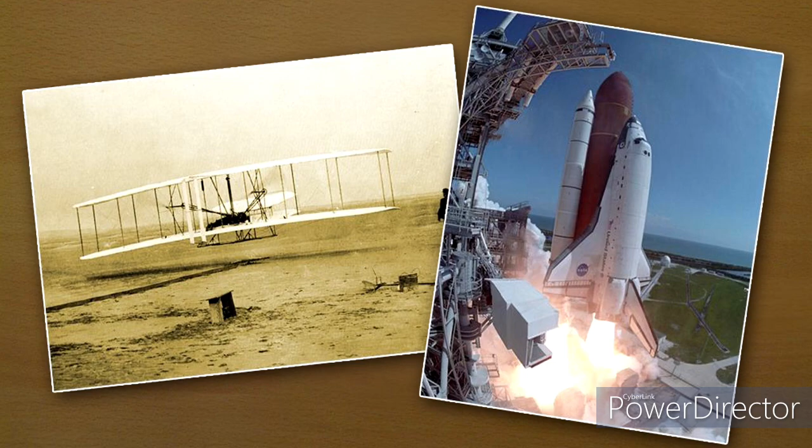As far as modes of transport are concerned, civil aviation has been the fastest growing and the most technically innovative of them all. From the first attempts at powered manned flight to regular spaceflight, we have only just exceeded 100 years of aviation.

What is incredible is that the first scheduled international air service was started in 1919. It is probably no coincidence, therefore, that the first International Conference on Civil Aviation took place in 1919 in Paris. Since then, the field of our chosen profession has been subjected to far more international legislation and international agreements than any other profession.

The overriding need, which is recognised by all, regardless of political inclination, is for higher and higher safety standards. The degree of international cooperation in this respect is outstanding, and shows that where there is genuine desire to achieve international agreement, it can be forthcoming.

After the Second World War and the huge technological advances that were made in aviation, the world at peace sought the solutions to the huge legal and economic concerns that confronted them. There was the question of commercial rights, the legality of overflights of other nations' airspace, and the maintenance and development of navigation equipment, often placed in sparsely populated parts of the world.

For these reasons, the United States of America conducted exploratory discussions with the Allied nations during the early months of 1944 to seek solutions to these challenges.

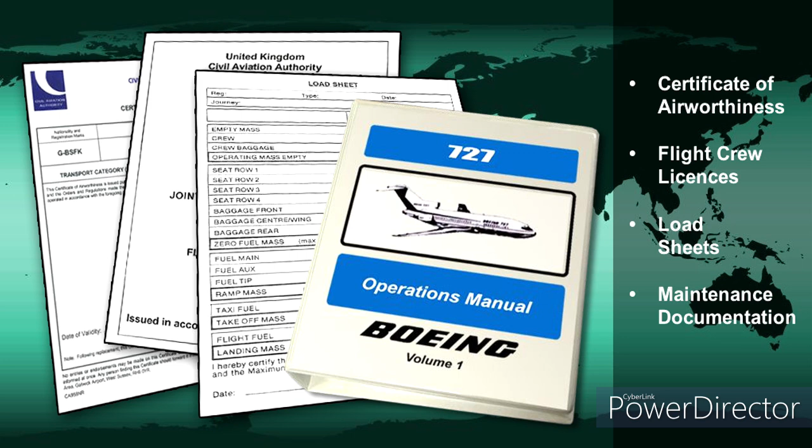Let's now take a closer look at the International Civil Aviation Organization itself. As we said earlier, the ICAO, created by the Chicago Convention, is an intergovernmental organization which has become a special agency related closely to the United Nations.

Based in Montreal, it provides the machinery to achieve standardization between contracting states for all technical, economic, and legal aspects of international aviation. The aims and objectives of the ICAO are to develop the principles and techniques of international air navigation.

It aims to foster the planning and development of international air transportation so as to ensure the safe and orderly growth of international civil aviation throughout the globe, encourage the arts of aircraft design and operation, encourage the development of airways, airports and air navigation facilities, meet the need for safe, regular, efficient and economical air transport, prevent waste caused by unnecessary competition, ensure the rights of contracting states are fully respected, avoid discrimination between contracting states, promote safety of flight in international airspace, and generally promote all aspects of international civil aviation.

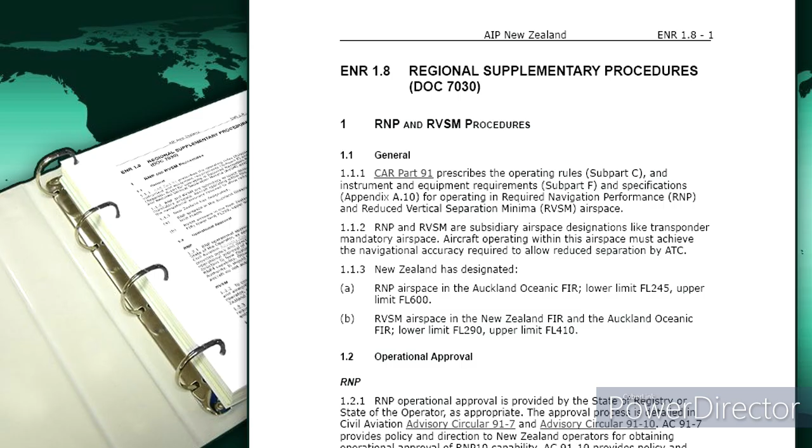It should be noted that PANS are approved by the ICAO Council, whereas SARPs are adopted by the ICAO Council.

The ICAO also publishes a wide variety of publications in the forms of circulars, pamphlets, manuals, and the ICAO Journal, which cover technical, economic, and legal subjects. It also issues training manuals, films, plans, and digests, all designed to inform the global aviation community.

Two other important documents have been developed to accommodate ICAO's desire to facilitate the exchange of commercial air transport rights. Not all signatories were originally able to agree to this desire, so two supplementary documents were created. These two supplementary agreements establish important international aviation rights.

The first agreement, the International Air Services Transit Agreement, makes provision for aircraft of any participating state to fly over or land for technical reasons in the territory of any other participating state. The second agreement, the International Air Transport Agreement, further provided for the carriage of traffic between the state of registry of an aircraft and any other participating state.

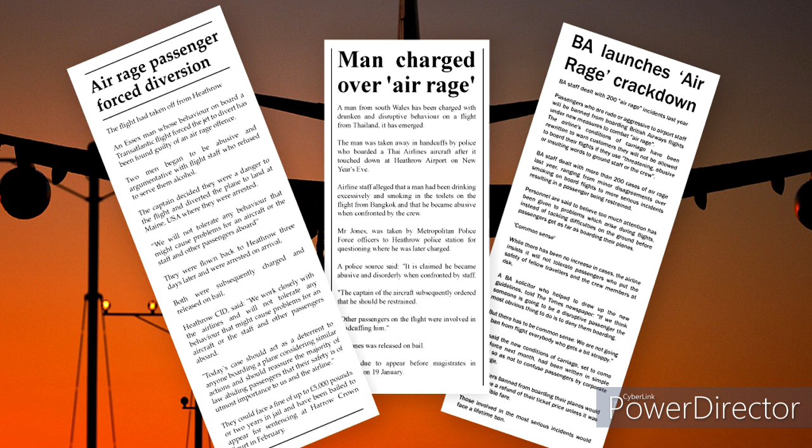The ICAO conventions allow any aircraft commander who has reasonable grounds the ability to restrain any party on board, and to protect the safety of the aircraft, persons or property on board, maintain good order on board, deliver or disembark any person to the competent authorities if he believes they are jeopardizing the aircraft. While the commander can demand help from a member of the crew, he or she can only request the aid of a passenger or other non-crew member.

You should now understand that the protection of all aspects of international air transportation is a complex and constantly changing situation. The cooperation between signatory states to ensure that the highest standards of aviation security apply, whilst maintaining the advantages of the expeditious nature of air travel, is essential.

Although most regulation has been defined and adopted by all states throughout ICAO, some states within their own regions have created separate additional layers of regulation, an example of which is the European Union, the EU. This lesson will therefore briefly mention the regulations and the governing bodies within Europe.

The driving force for a common civil aviation policy across Europe is the European Civil Aviation Conference, ECAC. Set up in 1955 under the auspices of the Council of Europe and ICAO, its aim is to define a European approach to a general structure for civil aviation in Europe, licensing, safety, European regional air traffic control, and a structure for civil aviation marketing within Europe. Because of its established position within Europe, ECAC is able to be the forum for the consideration of major civil aviation topics relevant to all the European states.

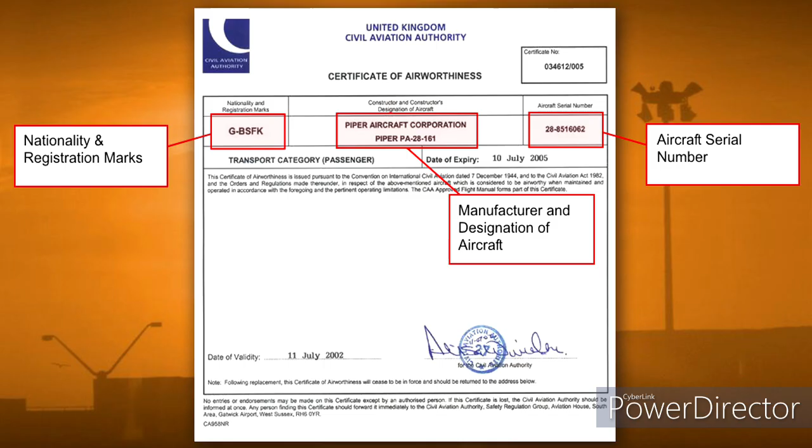The State of Registry of an aeroplane is responsible for determining if that aircraft continues to be airworthy, and is required to maintain a system for recording faults, malfunctions, defects or other occurrences which might affect its airworthiness. The state of design is required to ensure that a structural integrity program exists, supporting all aircraft. This program must specifically identify corrosion control measures.

The C of A will be renewed or remain valid, provided that the continued airworthiness of the aeroplane has been determined by a periodic inspection. The period between inspections is to take into account the type of service and the time elapsed between inspections, or be in accordance with the system of inspection established by the state. When an aeroplane is damaged, then the State of Registry must establish whether the damage is of such a nature that the aircraft is no longer airworthy.

Each aircraft is required to have a flight manual, in which the approved limitations are defined, and any additional information is contained as is necessary for the safe operation of the aeroplane.

As aviation grew rapidly during the early part of the century, the need to communicate with the ever-increasing number of aeroplanes in the sky made it necessary to ensure that all aeroplanes could be uniquely identified, much like cars are identifiable by their registration number. Therefore, as early as 1919, at the Paris Convention, delegates decided that all aircraft were to be registered, and that each aircraft was to display its registration mark.

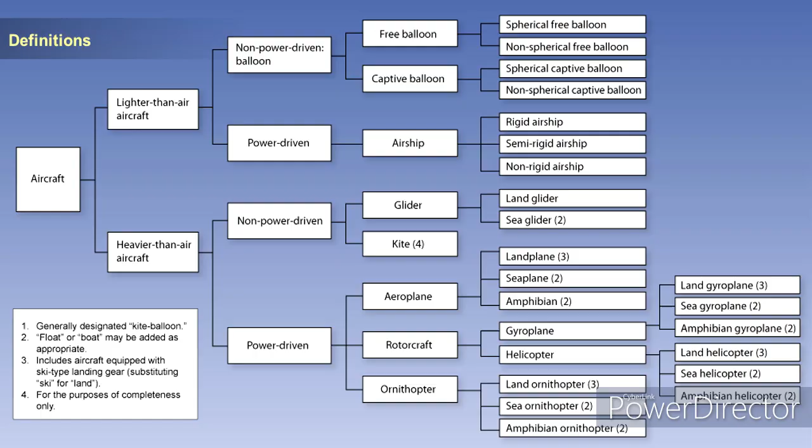It was decided that the nationality and registration marks would consist of a group of characters, with the nationality mark followed by a hyphen if the first character of the registration mark is a letter, then followed by a 3 to 5 character registration mark.

The nationality mark is selected from the series of nationality symbols included in the radio call signs, allocated to the state of registry by the International Telecommunication Union. This code is notified to ICAO and may consist of letters, numbers, or both.

A common mark is a prefix to an aircraft's registration, where the aircraft is operated by an international agency, not a country, like the Red Cross or United Nations. If this is the case, an establishing nation will assume the responsibility as the state of registry. This mark is assigned by the ICAO.

A good example is the common mark 4YB, assigned to aircraft of the Arab Air Cargo, run by Jordan and Iraq. The state of Jordan assumes state of registry.

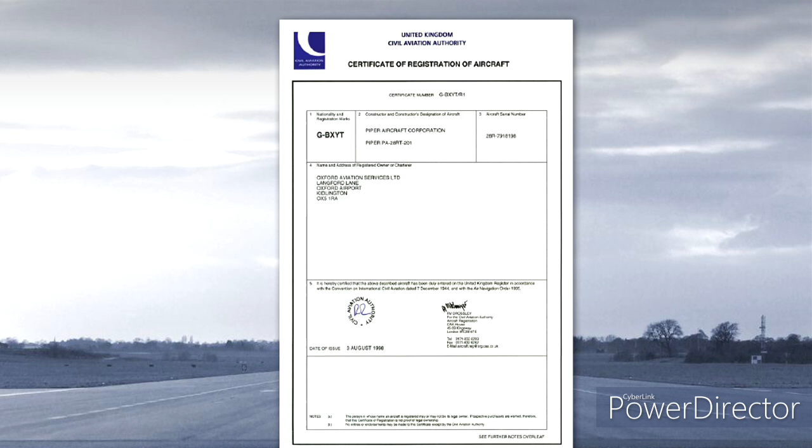The Certificate of Registration is an official document certifying that the state of registry has registered the aircraft. It will always detail the nationality or common mark, the registration mark, the manufacturer's designation of the aircraft, the serial number of the aircraft, the name and address of the owner, a certificate stating that the aircraft has been entered on the register of the state, the dated signature of the registering officer. The certificate is to be carried in the aircraft at all times.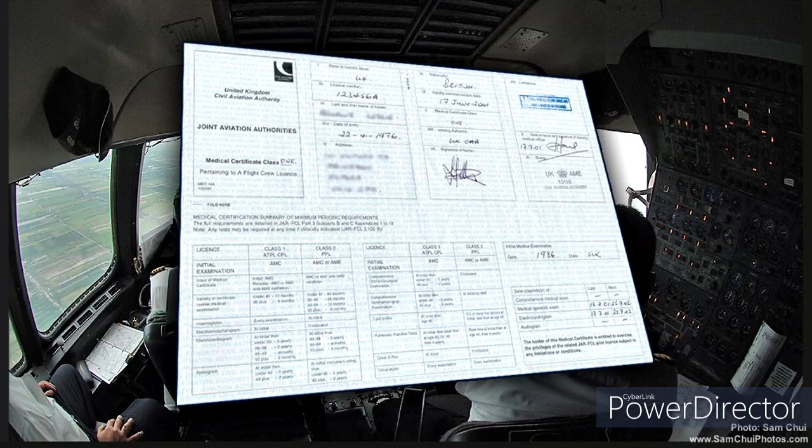Within the 5-year period of validity of a JAA licence, a national authority, referred to as the authority in JAA speech, will reissue the licence in the following circumstances: after initial issue of a rating or renewal of a rating, or at the discretion of the authority when a rating is revalidated.

The holder of a pilot licence who has attained the age of 60 is not permitted to act as pilot in command of an aeroplane engaged in commercial air transport work, except as a member of a multi-pilot crew, and provided that the other pilot has not attained the age of 60. A pilot reaching the age of 65 is not permitted to act as a pilot of an aeroplane engaged in commercial air transport. This limiting age is 60 in some member states, for example, France.

Applicants for a Joint Aviation Authorities licence must complete the requirements for licence issue to the satisfaction of the National Aviation Authority of the state under whose authority the training and testing for the licence were carried out. That state, on issuing the licence, then becomes the state of licence issue. The state of licence issue is the country in which the aviation authority which authorises a person to act as a pilot is headquartered.

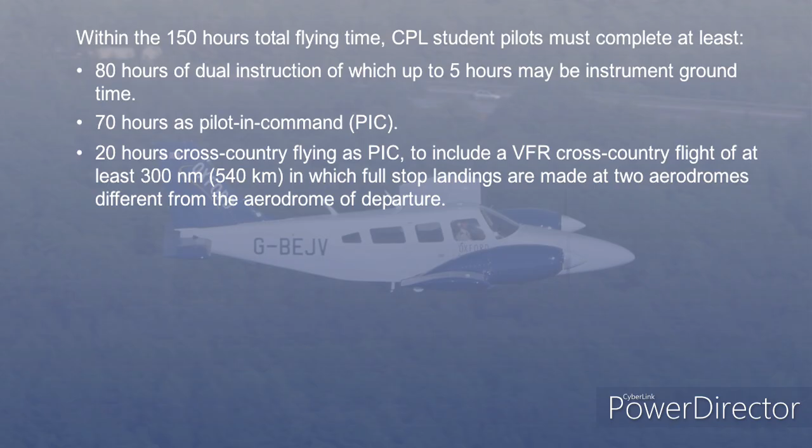During the course of which full-stop landings are made at 2 aerodromes different from the aerodrome of departure, 5 hours night flying, comprising 3 hours of dual instruction, to include at least 1 hour of cross-country navigation, as well as 5 solo takeoffs and 5 full-stop landings, 10 hours of instrument flight instruction, of which up to 5 hours may be instrument ground time in an FNPT 1 or 2 or flight simulator.

5 hours of flying instruction must be carried out in an aeroplane certificated for the carriage of at least 4 persons, and have a variable pitch propeller and retractable landing gear.

In the case of an entrant to CPL training who already possesses a PPL, 50% of the aircraft hours flown by the entrant prior to commencing the CPL course may be credited towards the required flying instruction, up to 40 hours flying experience, or 45 hours if a night flying qualification has been obtained.

The aim of the CPL modular course is to train PPL holders who do not wish or who are unable for any reason to undergo integrated training to the level of proficiency necessary for the issue of a CPL. Consequently, before commencing a CPL modular course, an applicant must hold a private pilot's license, issued in accordance with ICAO Annex 1.

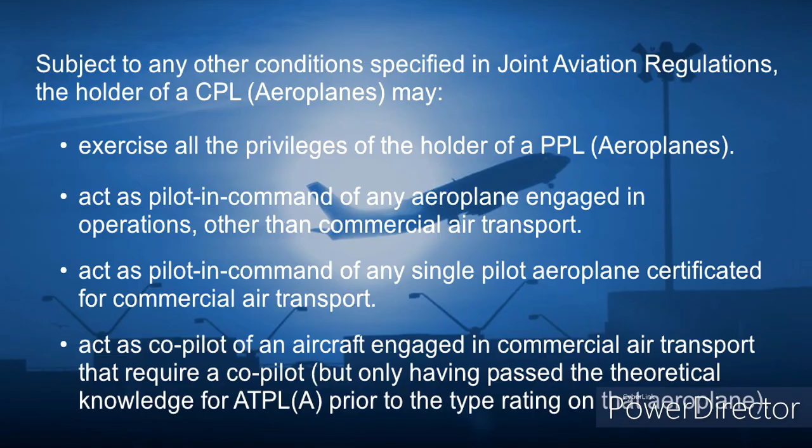Before a pilot may be granted, or continue to exercise, the privileges of a Joint Aviation Authority's airline transport pilot's license, he must hold a valid Class 1 medical certificate and have attained the age of 21 years.

Subpart G to JAR FCL1 covers the conditions which must be fulfilled before a JAA Airline Transport Pilot's Licence, aeroplanes, may be issued. An applicant for a JAA ATPL must undergo the prescribed syllabus of training at an approved flying training organisation. Training for the JAA ATPL consists of flying instruction and theoretical knowledge instruction.

Flying instruction must lead to the award of a commercial pilot's licence, together with a multi-engine instrument rating. The ATPL candidate must also have received instruction in multi-crew cooperation, as required by Joint Aviation regulations.

On completion of flying training, an ATPL candidate must demonstrate the ability to perform, as pilot in command under instrument flight rules, of an aeroplane type certificated for a minimum crew of 2 pilots, to a standard appropriate to the privileges granted to the holder of an ATPL.

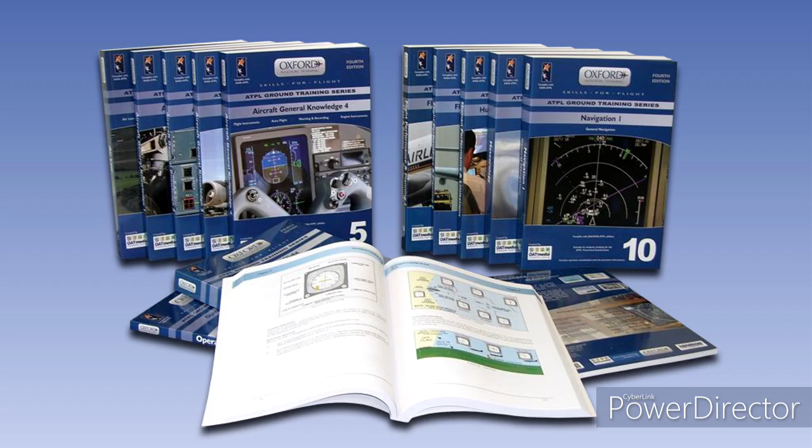The training requirements for issue of a JAA ATPL are not confined to flying training. In order to qualify as an airline transport pilot, a student must also demonstrate that he has acquired the theoretical knowledge required of a qualified airline transport pilot by passing ground examinations at ATPL level in the subjects shown on screen here.

In addition to the required training, before being awarded an airline transport pilot's licence, aeroplanes, a pilot must have completed at least 1,500 hours of flight time as a pilot of aeroplanes, of which not more than 100 hours may have been completed in an approved flight simulator. The 1,500 hours total flying time required for the award of a JAA ATPL aeroplanes must include the following experience.

Click on the inset picture to reveal each required type of flying experience. When all conditions have been revealed, the Continue button will flash.

500 hours of multi-pilot operations in a transport category or commuter category aeroplane or aeroplane of equivalent code. 250 hours as pilot in command, or at least 100 hours as pilot in command and 150 hours as co-pilot acting as PIC, but under the supervision of the pilot in command.

200 hours of cross-country flying, of which 100 hours shall be as pilot in command or as co-pilot performing under the supervision of a pilot in command.

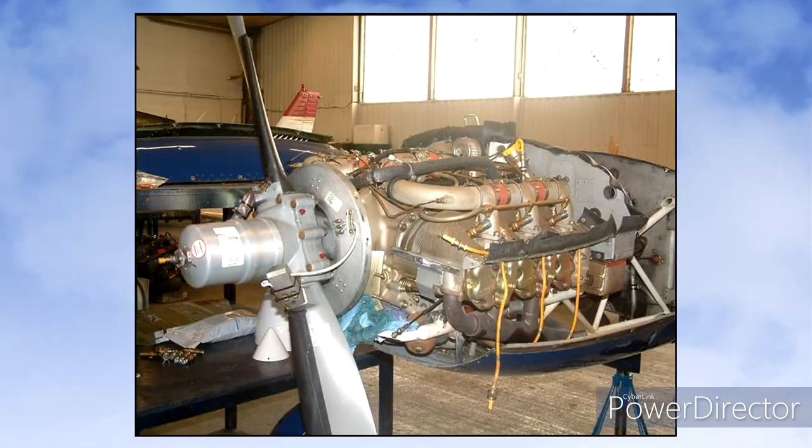Variable pitch constant speed propeller, retractable undercarriage, turbocharged or supercharged engine, cabin pressurization, tailwheel.

Successful completion of differences training does not result in the issue of any sort of certificate. The fact that differences training has been successfully completed is entered in the pilot's logbook or equivalent document and signed by a flight instructor, class rating instructor, or type rating instructor, as appropriate.

Now let's look at type ratings. As we have said, type ratings apply to more sophisticated types of aircraft. For instance, the holder of a commercial or air transport pilot's license normally requires a separate type rating for each type of aircraft he flies.

For example, a Boeing 737, Airbus A320, or Dash 8. There is no JAR FCL limit to the number of ratings that may be held at one time. JAROPS, however, may restrict the number of ratings that can be exercised at any one time.

In general, type ratings are required for each type of multi-pilot aeroplane, each type of single-pilot multi-engine aeroplane fitted with turboprop or turbojet engines, each type of single-pilot single-engine aeroplane fitted with turbojet engines, and any other type of aeroplane considered necessary by the National Aviation Authority.

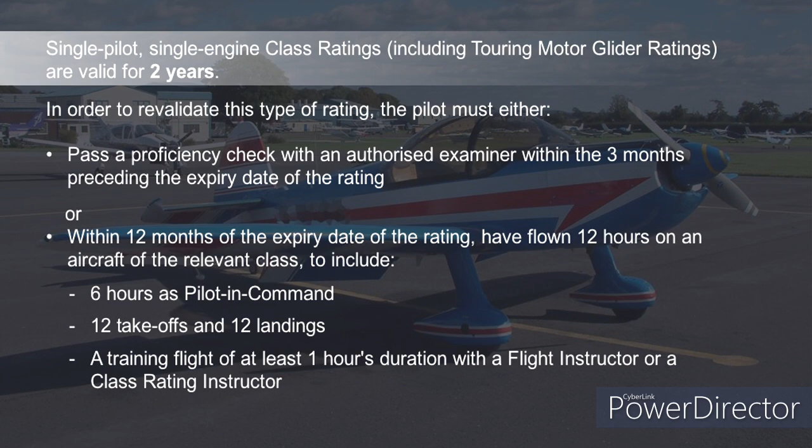Type ratings and multi-engine piston class ratings for aeroplanes are valid for 1 year from the date of issue. If the rating is revalidated within its period of validity, the new rating will be valid from the date of expiry of the old rating.

In order to revalidate a type rating or multi-engine class rating for aeroplanes, a pilot must fulfill the following conditions: undergo a proficiency check with an authorised examiner, for instance a type rating examiner, in the relevant type or class of aeroplane within the 3 months immediately preceding the expiry date of the rating. During the period of validity of the rating, the pilot must also carry out at least 10 route sectors as pilot of the relevant type or class of aeroplane, or 1 route sector as pilot of the relevant type or class of aeroplane, flown with an examiner.

In order to change to another variant of the aeroplane within one type rating category, for instance there is one type rating for both the Boeing 757 and the Boeing 767, differences or familiarization training may be required.

If a pilot fails any part of a proficiency check for a class rating or type rating, he must not exercise the privileges of that rating until all the parts of the proficiency check have been successfully completed.

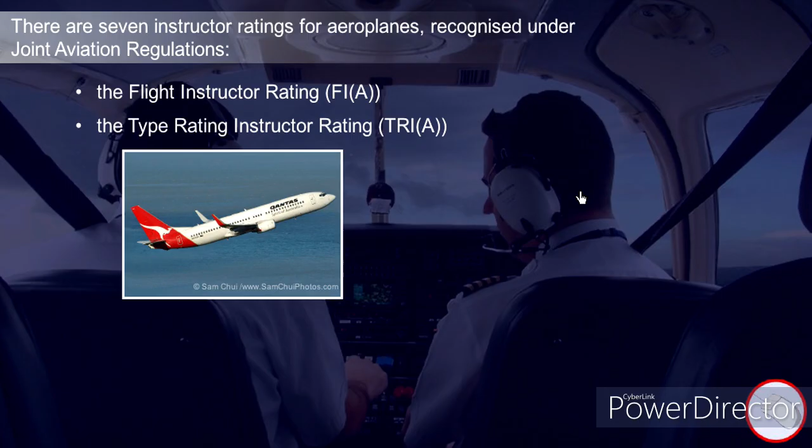The type rating instructor. A type rating instructor, as the name suggests, can prepare a pilot, usually a professional pilot, who is qualified on one type of aircraft to become qualified on a different type of aircraft.

The class rating instructor. A class rating instructor can prepare a pilot, usually a private pilot, who is qualified on one class of aircraft to become qualified on another class of aircraft.

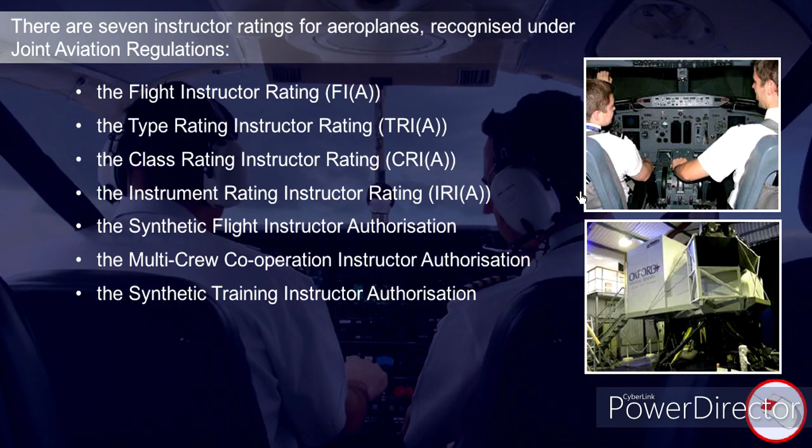The instrument rating instructor. The synthetic flight instructor authorization. The multi-crew cooperation instructor authorization. The synthetic training instructor authorization.

In addition, the multi-crew pilot's license, MPL authorization, will allow any of the instructor ratings above to instruct a student following the MPL program. For the remainder of this lesson, we will look a little more closely at flight instructor ratings.

Before being permitted to begin an approved course of training to become a flight instructor, an applicant must have satisfied the following conditions: be at least 18 years old, either possess a commercial pilot's license or higher level of license, or, if holding only a private pilot's license, have at least 200 hours flight time, of which 150 hours must be as pilot in command, have met the theoretical knowledge requirements for a commercial pilot's license or higher level of license, have received at least 10 hours instrument flight instruction, of which not more than 5 hours may be instrument ground time in a flight navigation procedures trainer or flight simulator, have passed a specific pre-entry flight test within the 6 months preceding the start of the flight instructor's course.

Have completed at least 30 hours on single-engine piston aircraft, of which at least 5 hours must have been completed during the 6 months preceding the pre-entry flight test. Have completed at least 20 hours of cross-country flight as pilot in command, including a flight totalling not less than 540 kilometres, or 300 nautical miles, in the course of which full-stop landings at 2 different aerodromes must be made.

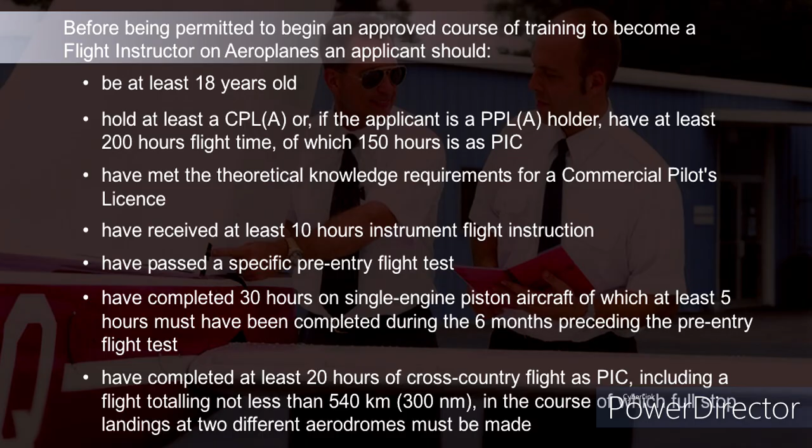In this section, we cover the privileges of the flight instructor rating. Until the holder of a flight instructor rating has completed at least 100 hours of flight instruction and, in addition, has supervised at least 25 student solo flights, the privileges of the rating are restricted. These restrictions will be removed from the rating when the above requirements have been met, and on the recommendation of the supervising flight instructor.

There are several privileges which appertain to the holder of a flight instructor rating, provided certain conditions have been fulfilled. However, in effect, certain restrictions continue to apply to the flight instructor rating until the conditions are fulfilled. Here are some examples of flight instructor privileges, and the conditions which must be fulfilled before those privileges can be exercised, once the initial restriction that we have just mentioned is lifted.

A flight instructor who holds an unrestricted flight instructor rating may conduct flight instruction for the issue of the private pilot's license and for class ratings for single-engine piston-driven aeroplanes.

The holder of an unrestricted flight instructor rating may carry out flight instruction for the issue of a commercial pilot's license, provided that he has completed at least 500 hours of flight time as a pilot of aeroplanes, including at least 200 hours of flight instruction.

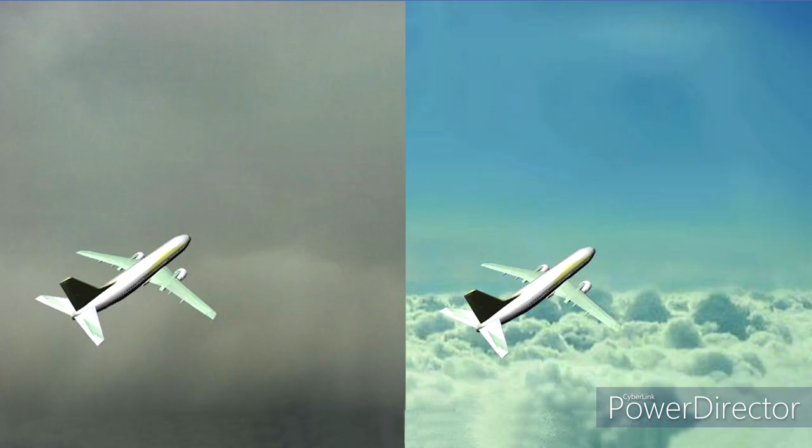However, in addition to the general rules of the air, aircraft commanders are subject either to the visual flight rules, referred to frequently as VFR, or the instrument flight rules, commonly known as IFR. When airborne, a pilot will always be flying in accordance with either the visual flight rules or the instrument flight rules.

Note that a pilot does not necessarily have to be flying by sole reference to his instruments when flying in accordance with the instrument flight rules. You will learn more about the instrument flight rules in a later lesson.

A pilot who elects to fly in accordance with the visual flight rules must be able to maneuver and navigate his aircraft and maintain separation from other aircraft and from terrain by reference to features outside the cockpit. Consequently, VFR flight is possible only when in-flight visibility, cloud base, and separation from cloud meet certain defined minima.

These minima are defined as visual meteorological conditions, most often referred to as VMC. VMC minima depend on the class of airspace an aircraft is flying in and the aircraft's altitude or flight level. You will learn more about that later. For the moment, it is sufficient for you to know that when a pilot is flying VFR, he must be in VMC.

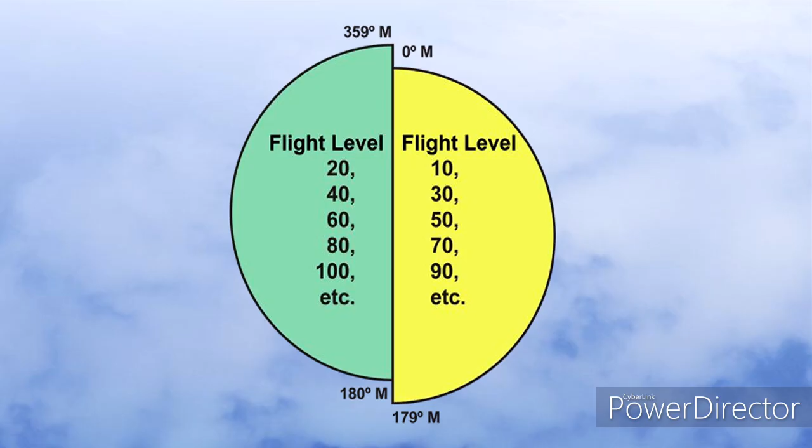The need for safe separation, whether it be from terrain or from other aircraft, is of course essential when visual meteorological conditions do not prevail and a pilot is required to maneuver and navigate his aircraft by sole reference to instruments.

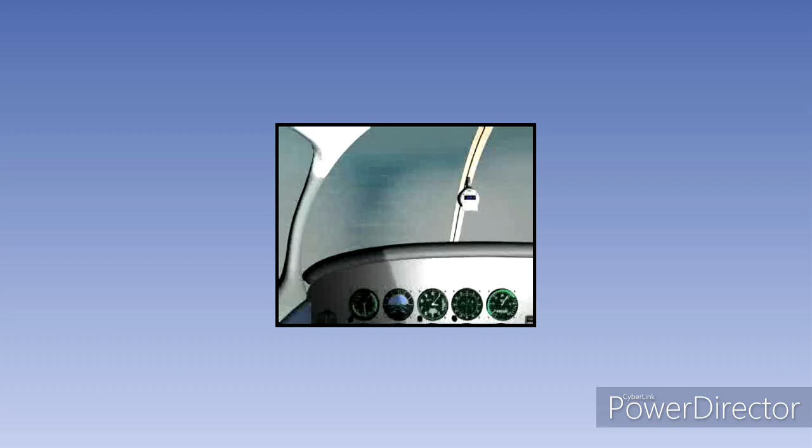Whenever visual meteorological conditions do not prevail, in other words where VMC minima are not met, conditions are described as instrument meteorological conditions, more commonly known as IMC. Flight in IMC must be in accordance with the instrument flight rules.

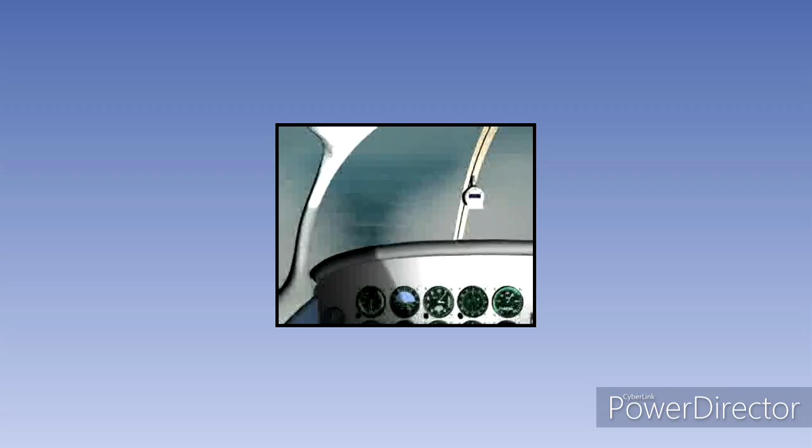Nevertheless, it is important to remember that IFR flights can take place either in VMC or in IMC. For instance, a commercial airliner flying on international routes in Europe, following airways, will invariably always be flying in accordance with the instrument flight rules for the whole route, irrespective of visibility conditions, that is, irrespective of whether IMC or VMC prevail.

One last point for you to note on the instrument flight rules is that IFR flight may apply to flight in both controlled airspace and uncontrolled airspace.

The flight crew member who is responsible, in accordance with Annex 2 to the ICAO Convention, for ensuring that an aircraft complies with the general rules of the air, as well as with VFR or IFR requirements, is the pilot in command, often referred to in air law terms as the PIC.

The pilot in command also has the right to override the rules if it is absolutely necessary to do so for the safety of his aircraft.

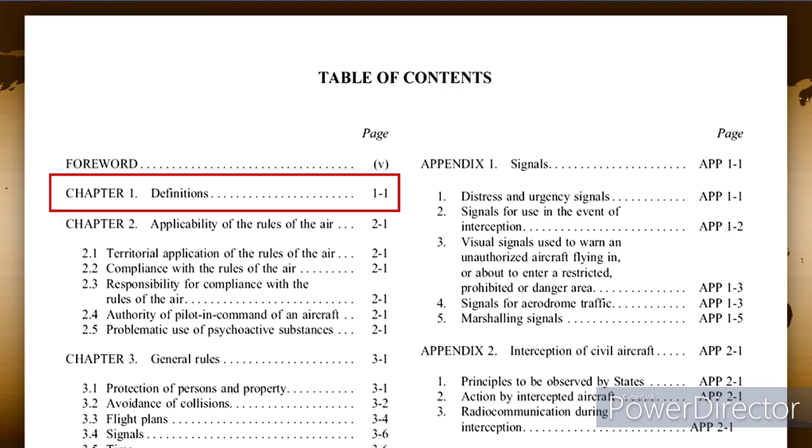First of all, you will see that Chapter 1 contains definitions of words, expressions, and concepts used in Annex 2. Here is the first page of the ICAO Annex 2 definitions.

You must ensure that you learn all these definitions, and be sure too that you always consult the latest edition of ICAO Annex 2.

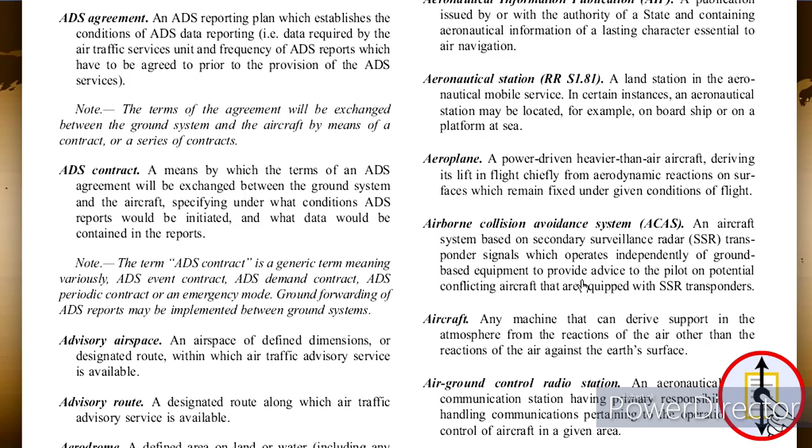This lesson deals with the subject of the visual flight rules. The visual flight rules, commonly referred to as VFR, are a set of rules which apply to aircraft flight where the pilot is able, at all times, to maintain separation from other aircraft and from terrain by reference to features outside the cockpit. Consequently, VFR flight is permitted only when visibility and separation from cloud meet certain defined minima, which you will learn about later. VFR flight then is not permitted when the minimum required visibility and separation from cloud are not present.

In order that you may clearly understand what VFR flight is, it is first of all of some importance that you should be able to distinguish between the two quite different concepts of the visual flight rules, that's VFR, and visual meteorological conditions, most commonly referred to as VMC. Many students confuse VFR with VMC. As student professional pilots, it is important that you do not.

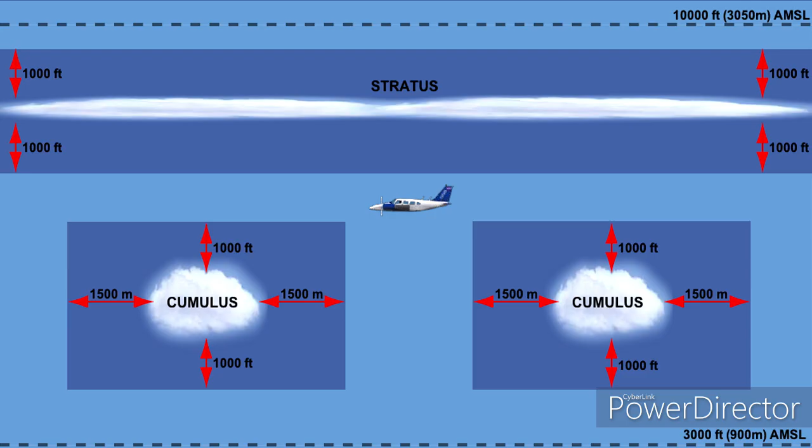VFR flight is permitted in uncontrolled and in controlled airspace, except in Class A airspace. In the United Kingdom, the London Heathrow Control Zone and Terminal Manoeuvring Area are both Class A airspace, as are all United Kingdom airways. VFR flight in controlled airspace will, on most occasions, except in Class E airspace, be under air traffic control.

Although often the separation of VFR flights from other flights is not provided by air traffic control, the ATC service being confined to the provision of traffic information. The majority of VFR flights outside controlled airspace take place without any contact with air traffic controllers.

Under the visual flight rules, pilots are themselves responsible for their own separation from other aircraft, on the principle of see and be seen. Pilots flying VFR are also responsible for their own separation from the ground.

Before passing on to the visual flight rules themselves, let's take a closer look at VMC minima. The visual meteorological conditions minima we will examine in this course are those laid down by ICAO. The VMC minima in the airspace over individual nations may be very slightly modified from the ICAO standards, but there should not be any significant difference. In any case, in the JAA ATPL examination, you will be examined on the ICAO figures.

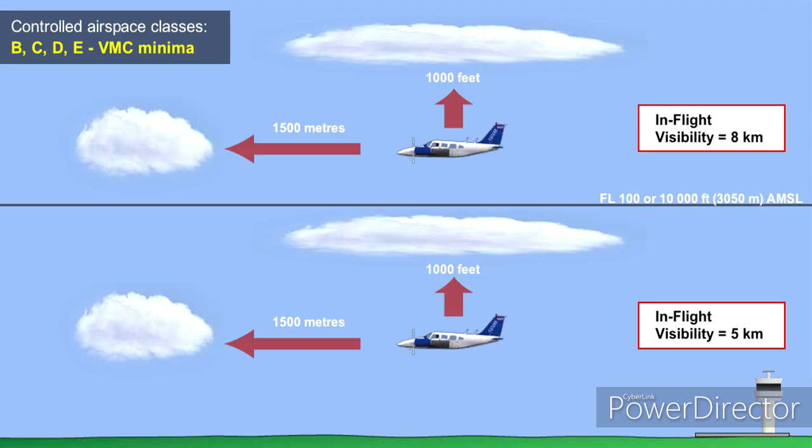Here are the VMC minima for controlled airspace, that's airspace of classes B, C, D, and E. Classes of airspace are covered in a separate lesson. Above 10,000 feet, or above flight level 100 if the transition altitude is below 10,000 feet, VMC minima in controlled airspace require the pilot to have an in-flight visibility of at least 8 kilometers, and to be able to maintain vertical separation from cloud of at least 1,000 feet, and horizontal separation from cloud of at least 1,500 meters. Use your pause button if you wish to remain on this frame.

Below 10,000 feet, or below flight level 100 if the transition altitude is lower than 10,000 feet, VMC minima in controlled airspace require the pilot to have an in-flight visibility of at least 5 kilometers, and to be able to maintain vertical separation from cloud of at least 1,000 feet, and horizontal separation from cloud of at least 1,500 meters.

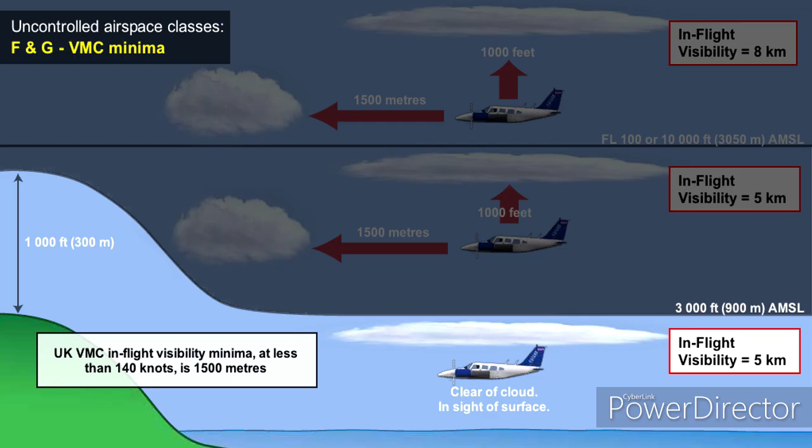The first and most fundamental VFR rule is the one that you have already learnt: that VFR flights must be conducted so that the aircraft is flown in conditions of visibility and distance from clouds equal to or greater than VMC. The picture on screen depicts visual meteorological conditions in uncontrolled airspace above 3,000 feet but below 10,000 feet, or flight level 100 if the transition altitude is lower than 10,000 feet. The details of this rule have already been covered in this lesson. This image depicts VMC for all of uncontrolled airspace.

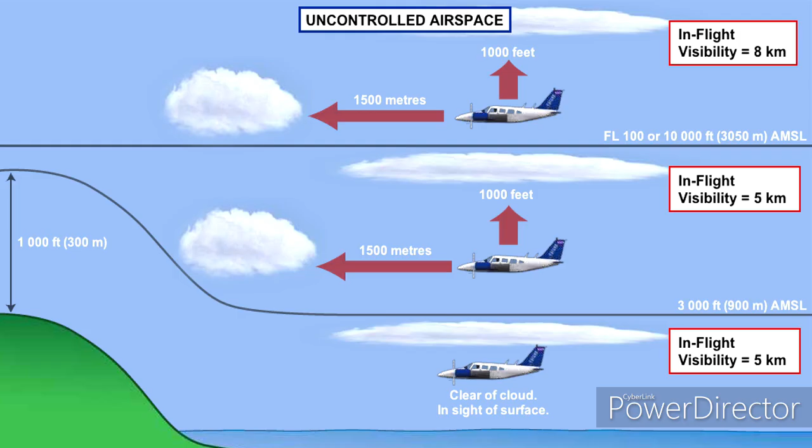Remember that no VFR flight is permitted in Class A airspace, such as the London Heathrow Control Zone, or in any United Kingdom airway.

In certain circumstances, for flight in aerodrome control zones, a special VFR clearance may be obtained from air traffic control, which permits a non-instrument qualified pilot to fly in the control zone in lower than normal VMC minima. You will learn about special VFR flight in a later lesson.

Now let us look at the rules covering the VMC minima requirement for VFR flight in control zones. Unless special clearance is obtained, flights operating in accordance with the visual flight rules are not permitted to take off or land or operate within the aerodrome traffic zone of an aerodrome with a control zone when meteorological conditions are below specified minima. Those weather minima stipulate that the cloud ceiling must not be less than 1,500 feet, and the ground visibility must not be less than 5 kilometers.

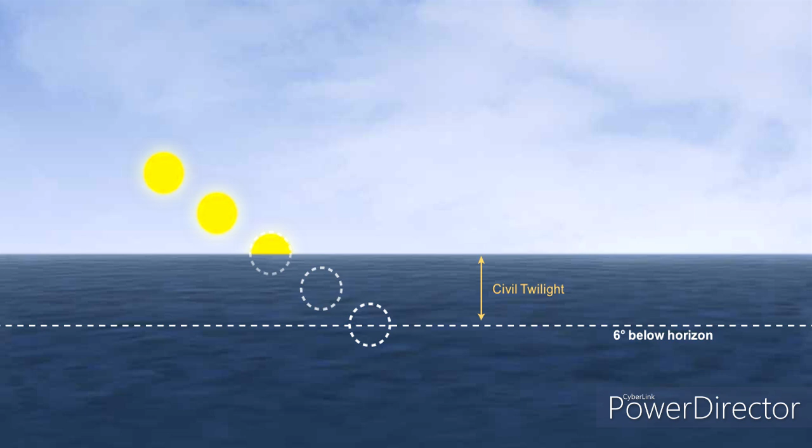There are different rules in different nations covering VFR flight at night. The actual definition of night also varies from nation to nation. The International Civil Aviation Organization defines night as the period from the end of evening civil twilight to the beginning of morning civil twilight. Civil twilight is defined as the period between sunset or sunrise and the time when the center of the sun's disk is 6 degrees below the horizon.

As far as VFR flight at night is concerned, ICAO Rules of the Air state simply that VFR flights at night may be permitted as laid down by the appropriate National Aviation Authority.

For example, the United Kingdom defines night as stretching from 30 minutes after sunset to 30 minutes before sunrise. And in the United Kingdom, VFR flight at night is not permitted. All night flying in the United Kingdom must therefore be conducted in accordance with the instrument flight rules. Although pilots do not need to possess an instrument rating to fly at night in the United Kingdom, they must, however, hold a night qualification.

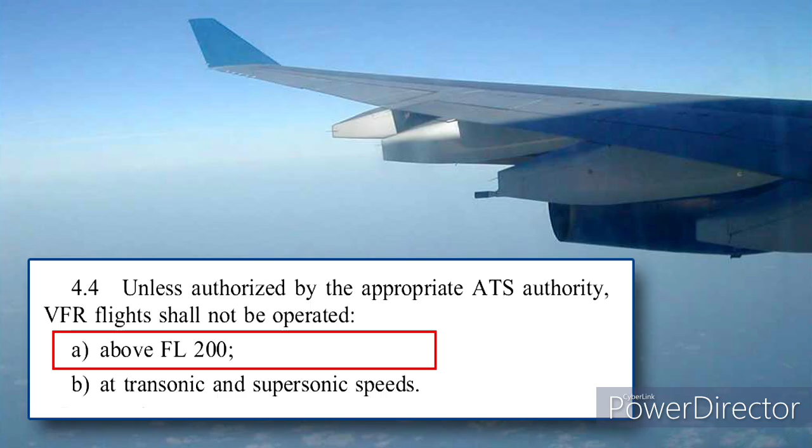Let's now look at how altitude or flight level affects the right to fly in accordance with the visual flight rules. Unless authorized by the appropriate Air Traffic Services Authority, VFR flights are not to take place above flight level 200. Incidentally, VFR flight may not be conducted at transonic or supersonic speeds at any level or altitude.

Authorization will on no account be given for VFR flights to operate above flight level 290 in areas where a vertical separation minimum of 1,000 feet or 300 meters is in effect above that flight level.

We'll now take a look at the VFR low flying rule. Except where necessary for takeoff or landing, or except by permission from the appropriate Air Traffic Services Authority, an aircraft is not to operate in accordance with the visual flight rules at a height of less than 1,000 feet, that's 300 meters, above the highest obstacle within a radius of 600 meters from the aircraft.

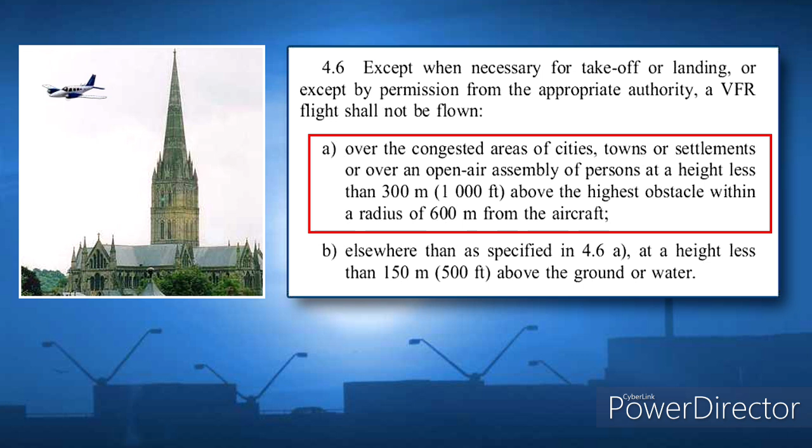Neither may an aircraft operating VFR fly at less than 1,000 feet over settlements, towns, cities, or other congested areas, or at less than 1,000 feet over an open-air assembly of persons.

Never forget, though, that adherence to the VFR low-flying rule does not absolve a pilot from the absolute minimum height rule, which requires the pilot, unless he is landing or taking off, never to fly below a height from which he can safely land his aircraft, in the event of an emergency, without causing undue hazard to persons or property on the ground. Elsewhere than over congested areas or open-air assemblies of persons, a VFR flight is not to operate at a height of less than 500 feet, that's 150 meters, above the ground or water.

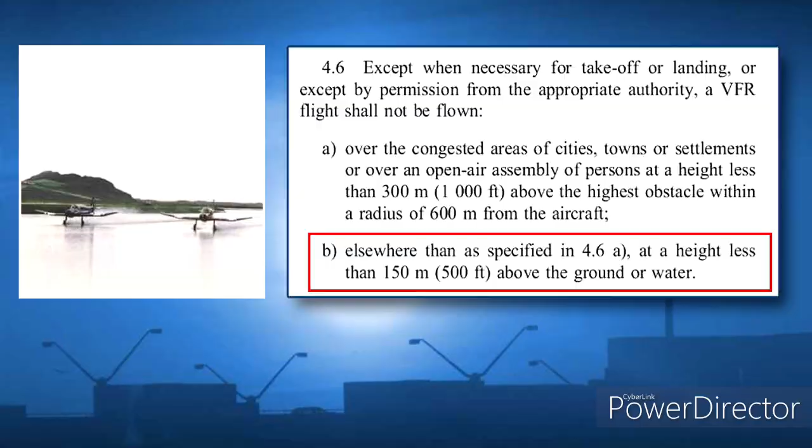Now we'll look at the ICAO rule regarding VFR cruising flight levels. Except where otherwise authorized by an Air Traffic Services Authority, ICAO Rules of the Air require that aircraft in level cruising flight higher than 3,000 feet above the ground or water, which are operating in accordance with the visual flight rules, keep to specified flight levels dependent on their magnetic track.

Here the rule is expressed in the form of a table. Notice that ICAO assigns separate flight levels to VFR and IFR flights within the semicircular principle.

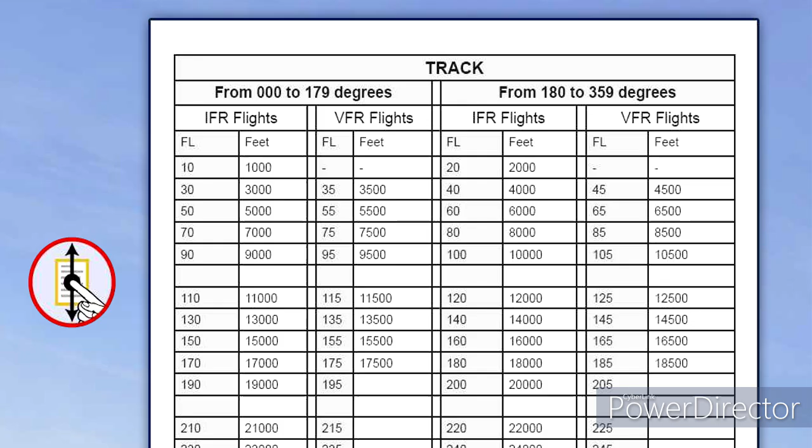VFR flight in controlled airspace is also covered by the rules of the air. VFR flights operating within airspace classes B, C and D, which will normally comprise control zones and control areas, when forming part of aerodrome traffic or operating as special VFR flights, must operate in accordance with the air traffic control requirements detailed in the rule of the air known as Rule 3.6. Rule 3.6 provisions basically stipulate that the VFR flight must obtain an air traffic control clearance and maintain a continuous air-ground voice communication watch on the appropriate communication channel.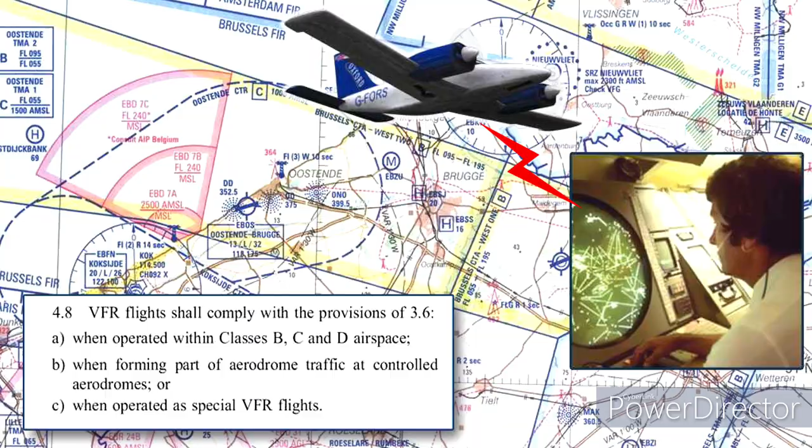A VFR flight operating along advisory routes or across international borders or along other routes designated by the appropriate Air Traffic Services Authority must also maintain a continuous air-ground voice communication watch on the appropriate communication channel and report its position as necessary.

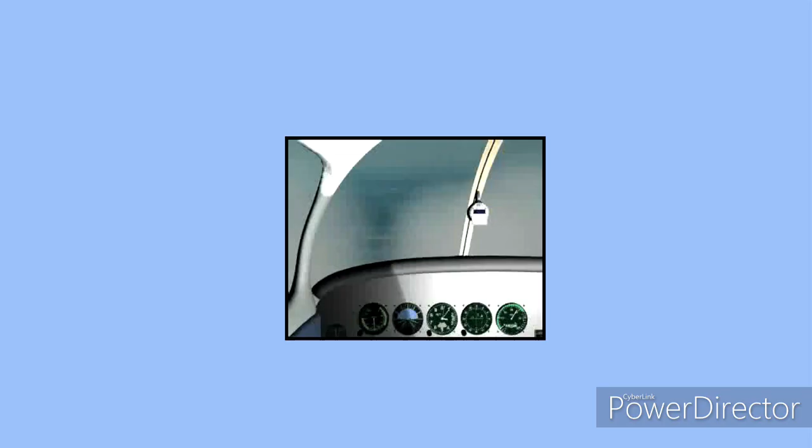If an instrument-qualified pilot is flying in accordance with the visual flight rules in uncontrolled airspace, and the weather deteriorates from visual meteorological conditions to instrument meteorological conditions, the pilot must continue the flight by switching to the instrument flight rules. You will learn what those rules are in the next lesson. Note that a non-instrument qualified pilot must at all times remain in visual meteorological conditions.

However, if an appropriately qualified pilot wishes to or is obliged to change from the visual flight rules to the instrument flight rules, he must take the following action. If a flight plan has been submitted, the pilot must communicate to the appropriate Air Traffic Services Unit the necessary changes to be effected to his current VFR flight plan.

The pilot of an aircraft receiving an air traffic control service, who changes from the visual flight rules to the instrument flight rules, must submit by radio his modified flight plan to the appropriate Air Traffic Services Unit, and, if in controlled airspace, be sure to obtain a clearance prior to proceeding in accordance with the instrument flight rules.

It is appropriate at this point to consider the rules of the air which govern flight in the proximity of aerodromes. The pilot of an aircraft operating at or in the vicinity of an aerodrome, whether or not he is within the aerodrome traffic zone itself, is required to conform with several rules.

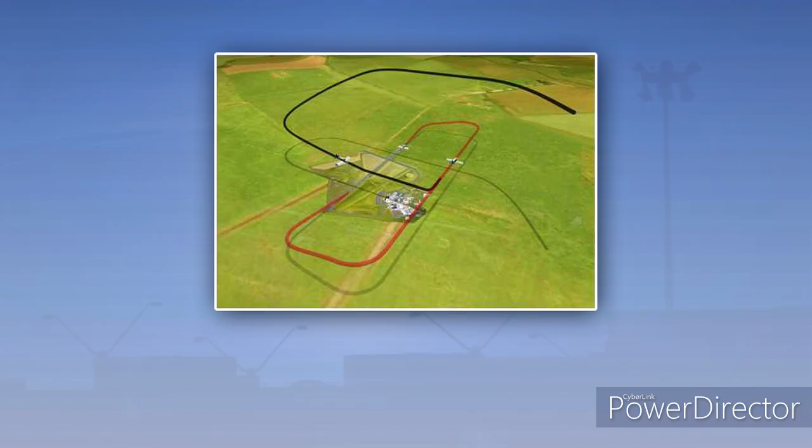He must observe other aerodrome traffic for the purpose of avoiding collision. He must conform with or avoid the pattern of traffic formed by other aircraft operating at the aerodrome. He must make all turns to the left when approaching for a landing and after taking off, unless a right-hand circuit pattern is in force, or unless otherwise instructed. He must land and take off into the wind, unless safety, the runway configuration, or air traffic considerations determine that a different direction is preferable.

That completes the lesson on the visual flight rules. As a final reminder, take care not to confuse visual flight rules with visual meteorological conditions. VFR is a set of rules, whereas VMC describes meteorological conditions defined in terms of visibility and distance from cloud. Flights in accordance with the visual flight rules must be conducted in visual meteorological conditions. However, flights conducted in accordance with the instrument flight rules are very often also conducted in visual meteorological conditions. Instrument flight rules are, like the visual flight rules, rules governing the conduct of an aircraft in flight. You will learn about the instrument flight rules in the next lesson.

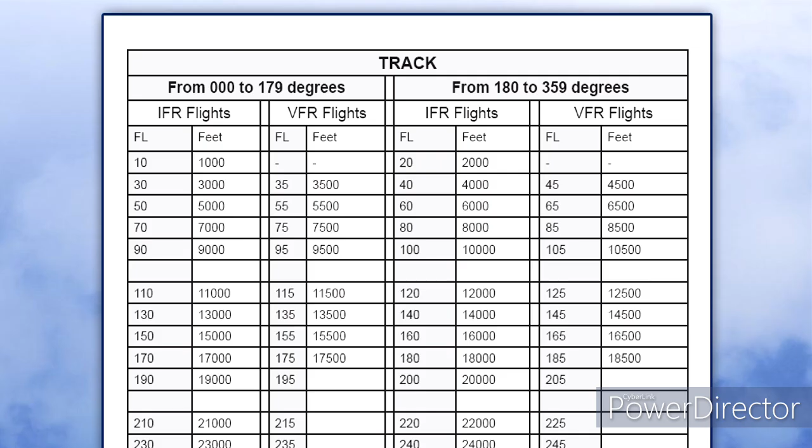Under the instrument flight rules, separation of aircraft from other air traffic is provided either by pilots receiving an air traffic control service or by aircraft flying at specified flight levels depending on their magnetic track over the ground. You should note that whereas all flights which take place in instrument meteorological conditions must be conducted in accordance with the instrument flight rules.

Flight under the instrument flight rules may also take place in visual meteorological conditions. Instrument flight rules are, as their name makes clear, a set of rules governing the conduct of an aircraft in flight. The instrument flight rules are quite independent of the prevailing meteorological conditions.

So even though the instrument flight rules assume that separation from terrain and other aircraft cannot be maintained by reference to features outside the cockpit, and that the aircraft is being operated by sole reference to its instruments, the instrument flight rules may still be followed or imposed even in visual meteorological conditions.

In fact, most commercial air transport flights within Europe and the United States are under continuous air traffic control, and therefore operate within controlled airspace under instrument flight rules for the whole flight, irrespective of whether visual meteorological conditions or instrument meteorological conditions prevail.

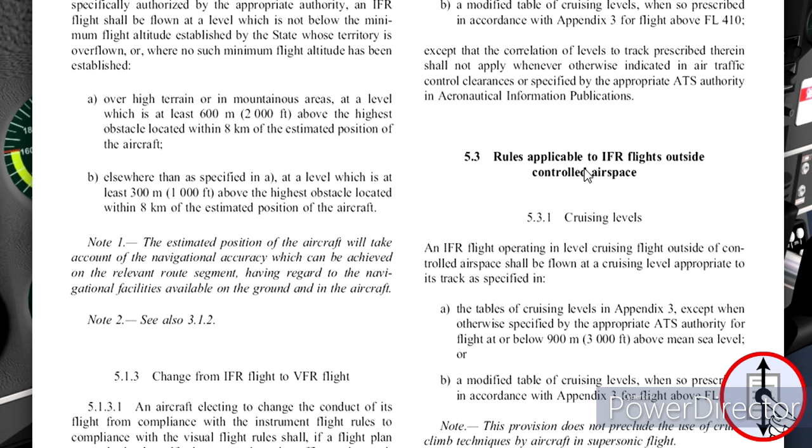In order to be able to fly in accordance with the instrument flight rules, aircraft must be equipped with suitable instruments and with navigation equipment appropriate to the route to be flown.

Flight in accordance with the instrument flight rules must not be conducted at a level which is below the minimum flight altitude for IFR flight established by the nation whose territory is being overflown. Where a nation has not established a minimum IFR flight altitude, the ICAO minimum level rules apply.

These are that an aircraft flying in accordance with the instrument flight rules over mountainous areas or high terrain is to remain at least 2,000 feet or 600 meters above the highest obstacle located within 8 kilometers of the estimated position of the aircraft. Elsewhere than over high terrain or mountainous areas, IFR flights are to remain at least 1,000 feet or 300 meters above the highest obstacle located within 8 kilometers of the estimated position of the aircraft.

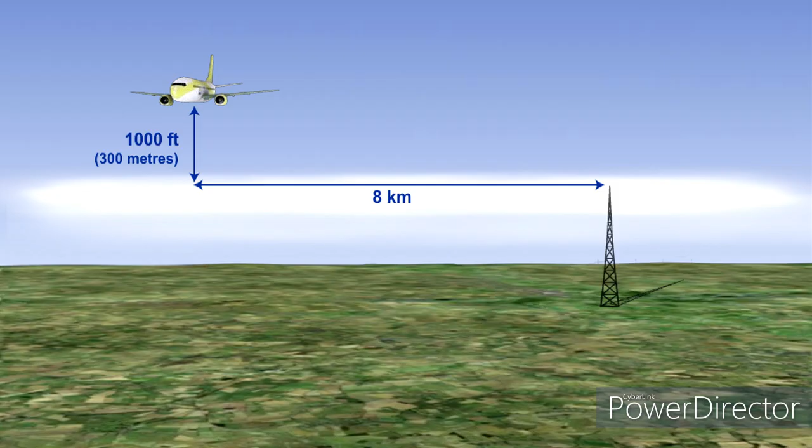For the purpose of adhering to the IFR minimum level rules, the estimated position of the aircraft must take account of the navigational accuracy which can be achieved on the relevant route segment, having regard to the navigational facilities available in the aircraft and on the ground.

Pilots should note that IFR minimum level rules do not absolve them from the necessity to adhere at all times to the overall minimum height rule, which stipulates that an aircraft must not be flown over congested areas or over an open-air assembly of persons below a height that, in the event of an emergency arising, would enable the aircraft to make a landing without undue hazard to persons or property on the surface.

The only exceptions to all the minimum level rules just mentioned are when an aircraft is taking off or landing, or when specifically authorized to descend below the established minimum levels by the appropriate authority.

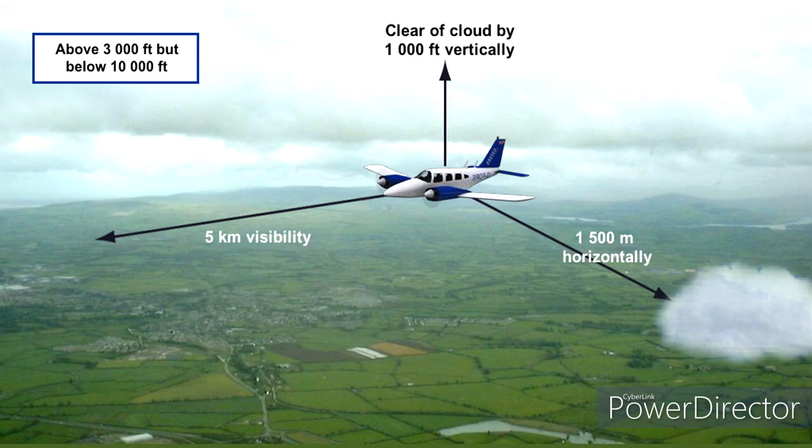In the lesson on the visual flight rules, you learnt about the rules governing the procedure for changing from VFR flight to IFR flight. You will not be surprised to learn that similar rules exist to cover the situation where a pilot wishes to, or is obliged to, change from the instrument flight rules to the visual flight rules.

If he has submitted a flight plan, a pilot who elects to change the conduct of his flight from compliance with the instrument flight rules to compliance with the visual flight rules must tell the appropriate air traffic services unit that the IFR flight plan is cancelled and communicate to that air traffic services unit the changes to be made to the existing flight plan.

When the pilot of an aircraft operating under the instrument flight rules wishes to cancel his IFR flight plan because he has encountered visual meteorological conditions, he must not cancel the IFR flight plan unless he anticipates and intends that the flight will be continued for a reasonable period of time in uninterrupted visual meteorological conditions.

When operating in accordance with the instrument flight rules in controlled airspace, the IFR flight is known as a controlled flight, and an air traffic control clearance is required. This clearance is requested by the pilot by submitting a flight plan to the appropriate air traffic services unit. When operating in controlled airspace, IFR flights must comply with air traffic control instructions and with all the sections of Rule of the Air 3.6.

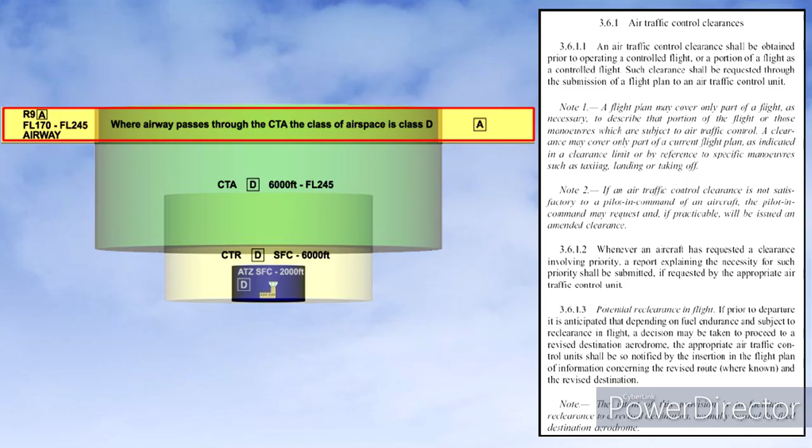Unless otherwise instructed by air traffic control or approved in an ATC clearance, when an aircraft operating in accordance with the instrument flight rules is in cruising flight within controlled airspace, the aircraft is to be flown at a cruising flight level dependent on the aircraft's magnetic track over the ground.

You can see that from 0 to 179 degrees, IFR cruising levels are at odd-numbered flight levels, while from 180 to 359 degrees, the IFR cruising levels are even-numbered flight levels.

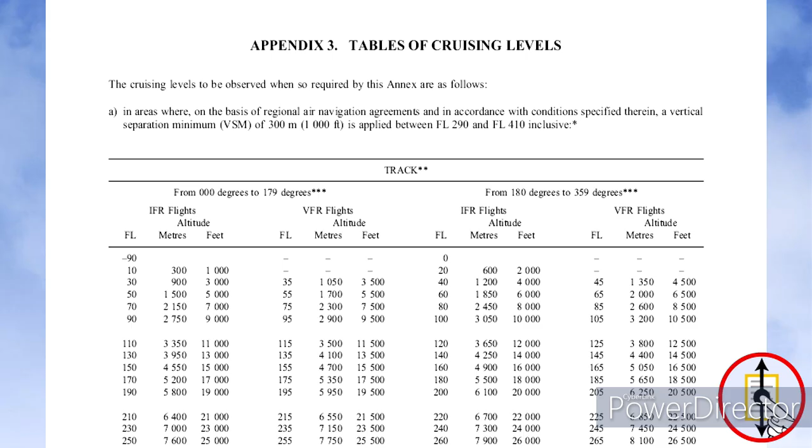The cruising levels that we have just illustrated are to give you merely an idea of the full table of cruising levels. That table is contained at Appendix 3 to Annex 2 of the ICAO Convention on International Civil Aviation. Be sure to refer to Annex 2 in order to study the details of this rule.

We show an extract from Appendix 3 to ICAO Annex 2 here. Be sure, though, to refer to the latest edition of Annex 2 when using the table for operational or examination purposes.

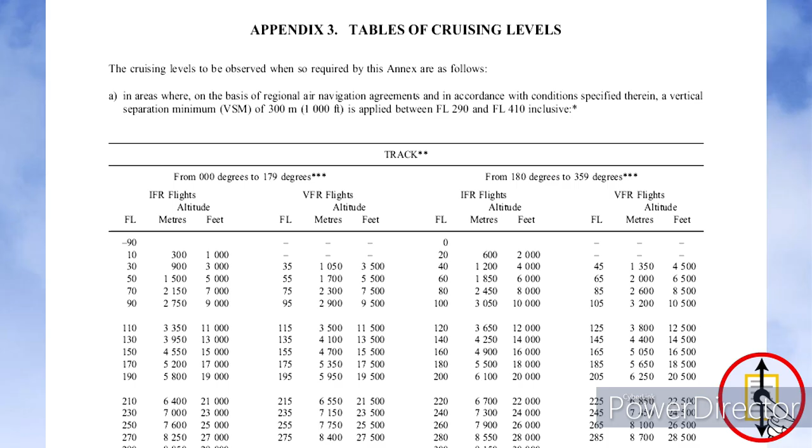The cruising flight level rule that you have just learnt about also applies to IFR flights operating in uncontrolled airspace, except when otherwise specified by the appropriate Air Traffic Services Authority for flight at or below 3,000 feet above mean sea level.

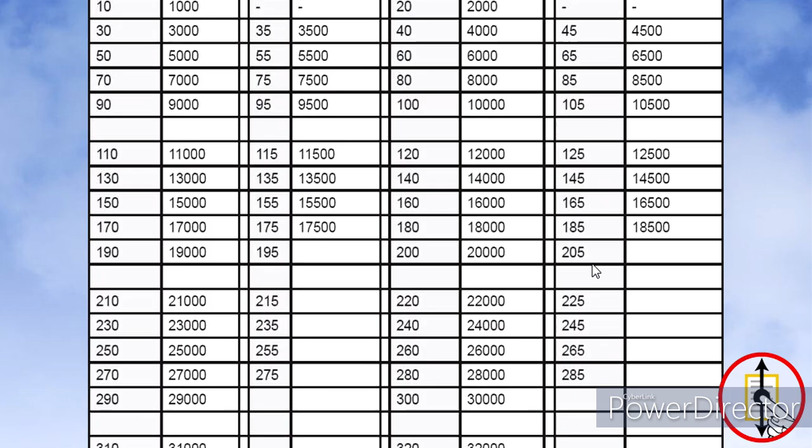An aircraft operating in accordance with the instrument flight rules outside controlled airspace is not always obliged to maintain an air-ground voice communication watch with an air traffic services unit.

The pilot of an IFR flight operating outside controlled airspace, but who is required by the appropriate Air Traffic Services Authority to submit a flight plan and to maintain an air-ground voice communication watch with an Air Traffic Services Unit, for instance, an IFR flight within advisory airspace, is required to report his position as specified in Rule of the Air 3.6.3, applicable to controlled flights. That completes the lesson on the instrument flight rules.

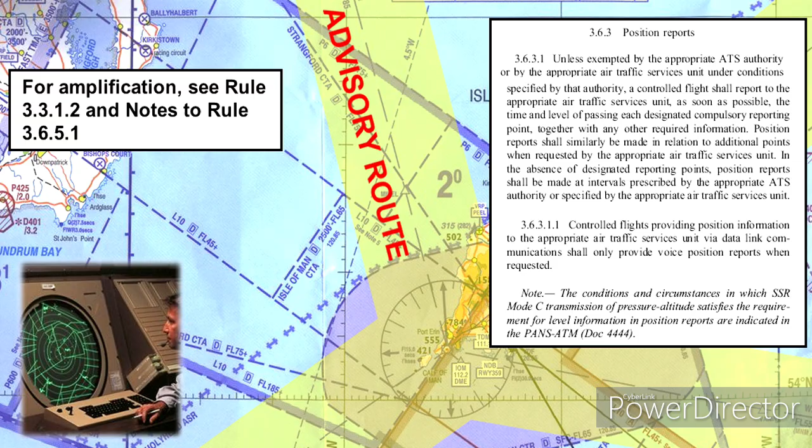In this lesson, we will cover the rules of the air dealing with minimum height, cruising levels, and avoidance of collisions, both in the air and on the ground.

The first part of Chapter 3, Annex 2, deals with the protection of persons and property. The key statement here is that an aircraft is not to be operated in a negligent or reckless manner so as to endanger the life or property of others.

One of the central tenets of this rule is that there is a minimum height below which aircraft may not be flown. The ICAO minimum height rule states that, except where necessary for takeoff or landing, or except when express permission is given by the appropriate authority, an aircraft may not be flown over the congested areas of cities, towns, or settlements, or over an open-air gathering of people, unless the aircraft is at such a height that will permit it, in the event of an emergency arising, to make a landing without causing undue hazard to persons and property on the ground.

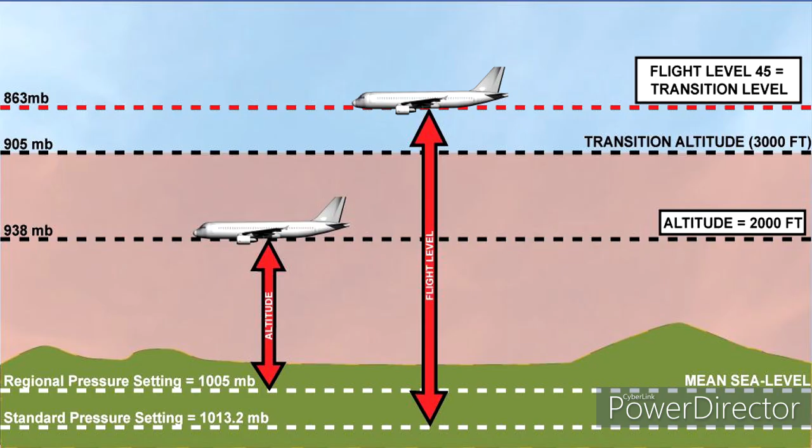Now let's move on to avoidance of collision. In all aircraft operations, it is of supreme importance that rules be established to help keep the risk of collision between aircraft to an absolute minimum, whether the aircraft are in the air or on the ground. When aircraft are under radar control and flying in accordance with the instrument flight rules, collision avoidance is the responsibility of the air traffic controller as well as that of the pilot.

And so the rules of the air on collision avoidance may seem to apply predominantly to aircraft flying in accordance with the visual flight rules. Nevertheless, collision avoidance rules must be observed and put into practice by all pilots. It is crucial that flight crew never relax their vigilance in seeking to avoid collisions between aircraft in flight, regardless of the type of flight, or of the class of airspace in which the aircraft is operating. Vigilance of flight crew on the ground is also of great importance.

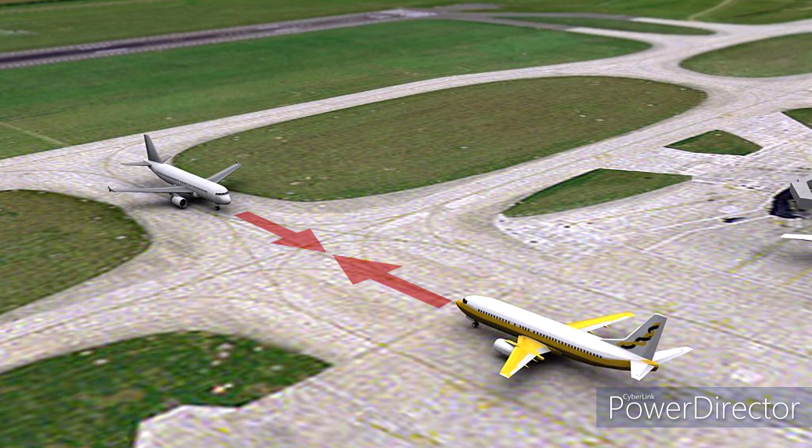One of the most fundamental rules of collision avoidance is the proximity rule. That rule states that an aircraft is not to be operated in such proximity to other aircraft as to create a collision hazard. This is why aircraft are not to be flown in formation, except by prearrangement between the pilots in command of the aircraft taking part. If the formation flight is to take place in controlled airspace, it must be in accordance with conditions prescribed by the appropriate air traffic services authorities.

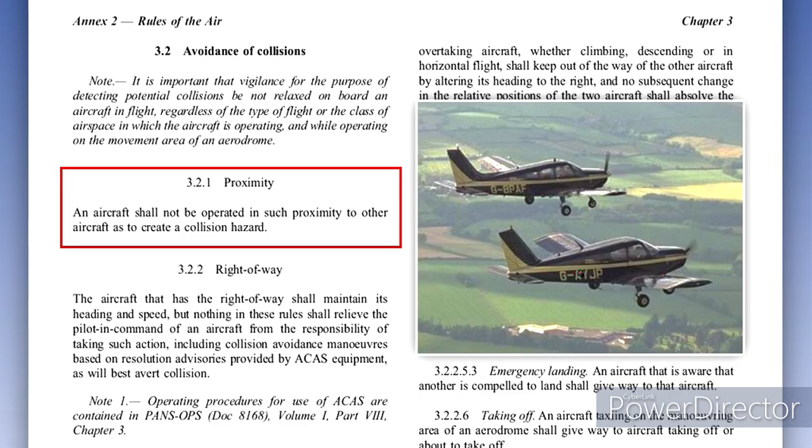It is in order to help ensure that collisions between aircraft do not occur that rules concerning rights of way have been established. In all rules pertaining to right of way, the aircraft which has the right of way maintains its heading and speed. However, it is crucial that pilots understand that no right of way rule relieves the pilot in command of an aircraft having the right of way from the responsibility of taking avoiding action should it prove necessary. The pilot of the aircraft required to give way may not have seen the other aircraft. It can easily be fatal in the air for a pilot to insist on his priority.

It is incumbent on all pilots to take action to avoid collision. This principle includes action to avoid collision based on resolution advisories provided by ACAS equipment. ACAS is the Airborne Collision Avoidance System, equipment that seeks to warn pilots of the proximity of other aircraft.

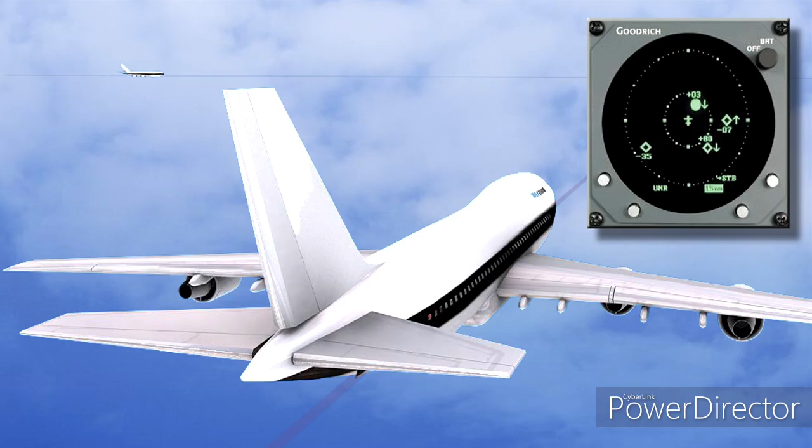The remainder of this lesson deals with specific rules of the air from Chapter 3 of ICAO Annex 2, which pertain to avoidance of collision and rights of way. An aircraft which is obliged by the rules which follow to keep out of the way of another aircraft must avoid passing over, under, or in front of the other aircraft unless passing well clear. Aircraft taking avoiding action must also take into account the effect of wake turbulence.

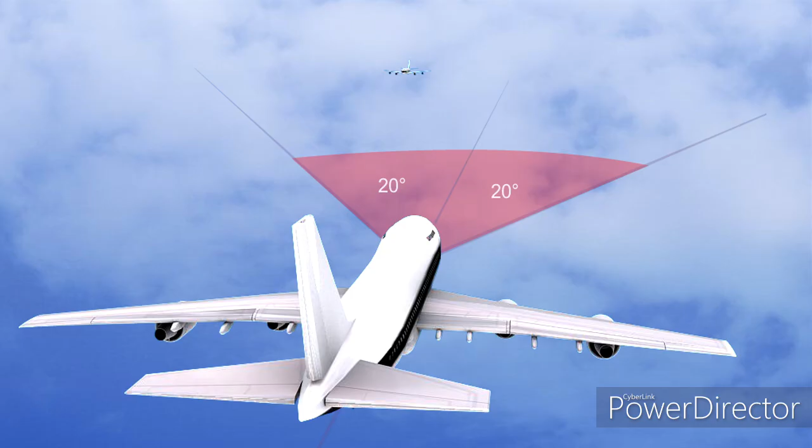If two aircraft are approaching head-on and there is a danger of collision, both aircraft are to alter heading to the right. It is generally accepted that anything within the sector 20 degrees either side of dead ahead is head-on. This is particularly important nowadays as navigation equipment is so accurate that it will place aircraft exactly on the center line of airways. All it takes is an incorrect flight level assignment or poor height keeping, and a head-on situation is much more likely to occur than it used to be.

When two aircraft of the same category, for instance two powered heavier-than-air aircraft, are converging at approximately the same level, the aircraft which has the other aircraft on its right is to give way. Expressed simplistically, the aircraft on the right is in the right and should maintain speed and heading.

Where the converging aircraft are not of the same category, being on the right does not automatically give that aircraft the right of way. In the case of different categories of aircraft, the following right-of-way rules apply. Power-driven, heavier-than-air machines are to give way to airships, balloons, and gliders. Power-driven, lighter-than-air machines, for instance airships, are to give way to gliders and balloons. Gliders are to give way to balloons. Power-driven aircraft are to give way to aircraft which are towing other aircraft or objects.

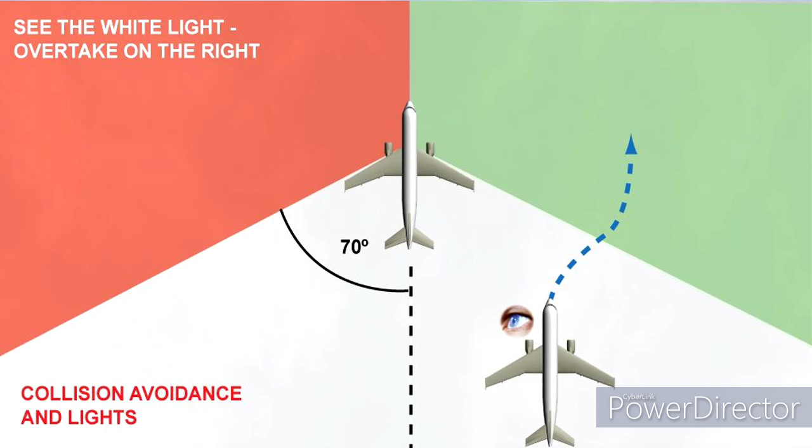Now let's look at the situation of overtaking. An overtaking aircraft is a faster aircraft that approaches another aircraft from behind, within a 70-degree arc either side of the tail of the aircraft being overtaken. At night, the overtaking aircraft in this position would be unable to see either of the other aircraft's port or starboard navigation lights. It is the aircraft which is being overtaken that has the right of way.

The overtaking aircraft, whether climbing, descending, or in horizontal flight, must keep out of the way of the other aircraft by altering its heading to the right. The overtaking aircraft must stay out of the way of the aircraft being overtaken until well clear. Furthermore, the pilot of the overtaking aircraft should take into account the wake turbulence which might possibly affect his own aircraft or the aircraft being overtaken during the overtaking maneuver.

Now let's move on to the question of priority on landing. An aircraft in flight or operating on the ground or water is required to give way to aircraft landing or in the final stages of an approach to land.

When two or more heavier-than-air aircraft are approaching an aerodrome for the purpose of landing, aircraft at the higher level must give way to aircraft at the lower level. But the lower aircraft must not take advantage of this rule to cut in front of another aircraft which is in the final stages of an approach to land, or to overtake that aircraft.

In any event, power-driven, heavier-than-air aircraft are to give way to gliders. An aircraft whose pilot is aware that another aircraft is compelled to land because of an emergency must give way to that aircraft.

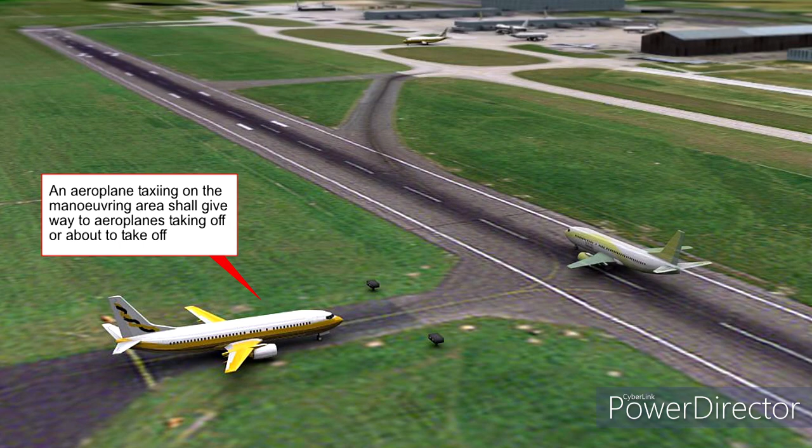Let's pass now to the issue of priority on takeoff. An aircraft taxiing on the maneuvering area of an aerodrome must give way to aircraft taking off or about to take off.

Chapter 3 also contains rules governing the surface movement of aircraft. An aircraft taxiing on the maneuvering area must stop and hold at all runway holding positions, unless otherwise authorized by air traffic control. Likewise, it must stop and hold at all lighted stop bars, such as those shown here at a taxiway intersection. The aircraft may proceed further only when the lights are switched off.

If there is any danger of collision between two aircraft taxiing, the following collision avoidance rules apply. When two aircraft are approaching head-on, or approximately so, each aircraft must stop, or, where practicable, alter its course to the right, so as to keep well clear.

When two aircraft which are taxiing are converging, the one which has the other on its right must give way. Any aircraft which is being overtaken by another aircraft has the right of way. The overtaking aircraft must keep well clear of the aircraft being overtaken.

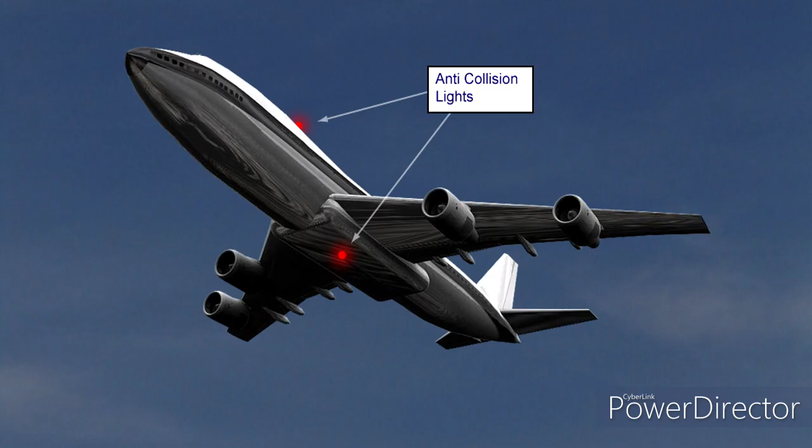The systems of displaying aeroplane navigation and anti-collision lights, or any other lights designed to draw attention to the presence of an aeroplane, are covered in other lessons. But you may be asked questions on the subject in the ATPL Air Law exam. To this end, Air Law restricts itself to when you must have the lights fitted and when they must be on. From sunset to sunrise, as defined by the authority, aeroplanes are to be illuminated with anti-collision lights, intended to attract attention to the aeroplane.

Additionally, navigation lights that define the relative path of the aeroplane are to be displayed. No other light can be shown if it is likely to be mistaken for these lights. If aeroplanes have anti-collision lights fitted, they should be on by day as well. Aeroplanes should not land specifically for the purpose of repairing broken anti-collision lights.

From sunset to sunrise, all aeroplanes moving on the movement area shall display navigation lights that indicate the relative path of the aeroplane. All aeroplanes on the movement area shall display lights that define the extremities of their structure, unless stationary and otherwise adequately illuminated. Aeroplanes parked on an apron will be adequately illuminated because the apron is required to be lit at night. Away from an apron, aeroplanes must be lit.

All aeroplanes on the movement area of an aerodrome are to display lights that attract the attention of other aeroplanes. Aeroplanes with engines running are to display lights to indicate the fact. Red anti-collision lights suffice for this purpose. In fact, it is usual to switch on the anti-collision lights when an aircraft is manned to indicate the fact and serve to warn that the engine may be started.

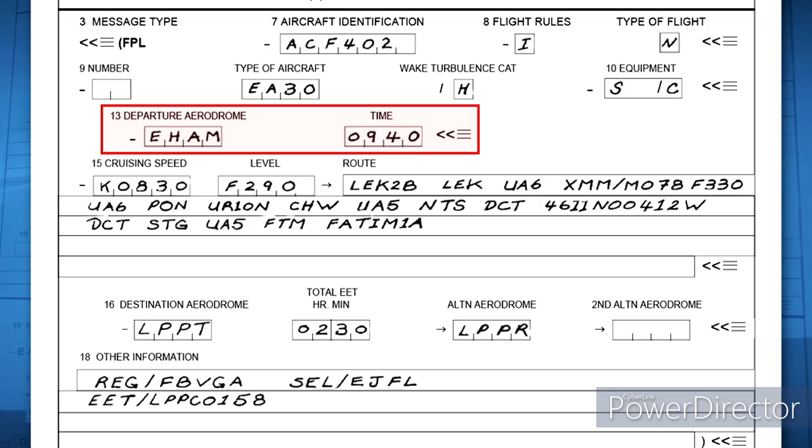These items should indicate a place where the ATSU can obtain more information about the flight, and the time should be the first time an air traffic control or advisory service is required.

Cruising speeds, cruising levels, route to be followed, destination aerodrome and total elapsed time, alternate aerodrome, fuel endurance, total number of persons on board, emergency and survival equipment, other information.

With the exception of inadvertent deviations from planned flight, all changes to a flight plan submitted for IFR flight, or a VFR flight operated as a controlled flight, are to be reported as soon as practicable to the appropriate Air Traffic Services unit. For other VFR flights, significant changes to flight plans should be reported as soon as practicable to the appropriate ATSU.

Closing a flight plan, or arrival report, is to be done in person, by radio, or data link, as soon as possible after landing, to the appropriate ATSU at the arrival aerodrome, for any flight or portion of flight for which the flight plan has been submitted.

On receipt of the arrival report, the ATSU will close the flight plan. When communication facilities are known to be inadequate, and alternative message handling facilities do not exist, a message comparable to an arrival report is required.

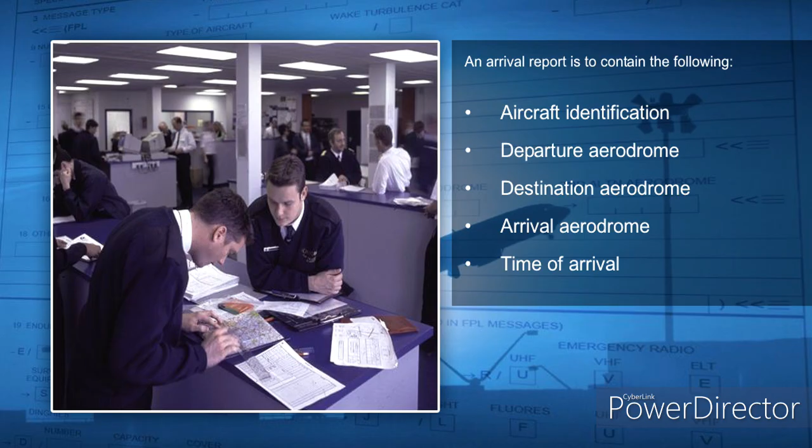Coordinated Universal Time is to be used, and is to be expressed in hours and minutes using the 24-hour clock, beginning at midnight. Time checks by ATC are given accurate to the nearest minute.

An ATC clearance is to be obtained prior to operating a controlled flight, or a portion of a flight as a controlled flight. Such a clearance can be requested by the submission of a flight plan to an ATCU.

A pilot in command may request an amended clearance if the one issued is unsatisfactory, and an amended clearance will be issued if practicable. It would be normal practice for a clearance to be passed to the aircraft before departure, and at busy aerodromes, a discrete clearance delivery frequency is specifically established for the issue of ATC clearances.

Before passing the pilot a clearance, you will be asked, 'Ready to copy?' When ready, your response will be, 'Go ahead.' The clearance will be read to you, and when terminated, you will be asked to read back.

You are required to read back the clearance verbatim. If you make an error, you will be asked to repeat the process until you correctly read back the clearance. This ensures that you completely understand the issued clearance. Don't forget that air traffic controllers are fallible, so if you believe there is an error in your clearance, query it.

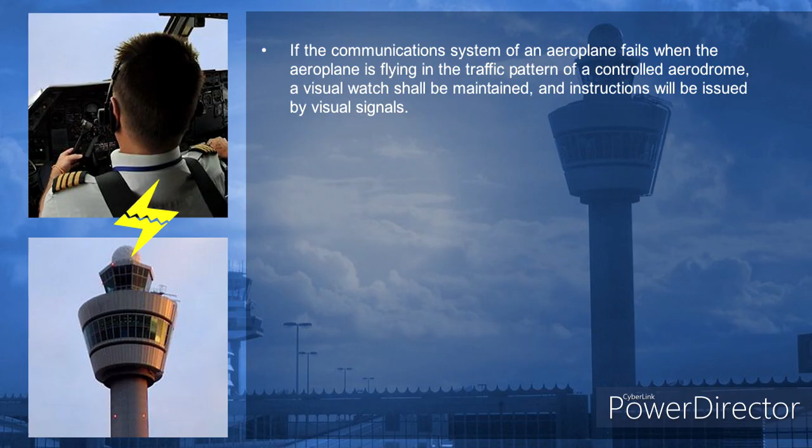If failure occurs during flight in VMC, regardless of flight rules, the aeroplane is to continue to fly VMC, land at the nearest suitable aerodrome, and report its arrival by the most expeditious means to the appropriate ATCU.

If failure occurs in IMC and the airspace is not under radar control but is controlled procedurally, the following are to be complied with. First, unless prohibited by a regional air navigation agreement, the aircraft is to maintain its last assigned speed and level, or minimum flight altitude if higher, for a period of 20 minutes following the aircraft's failure to report over a compulsory reporting point, and thereafter adjust level and speed in accordance with the filed flight plan.

Second, proceed according to the current flight plan route to the appropriate designated navigation aid serving the destination aerodrome, and, when required, hold over this aid until commencement of descent.

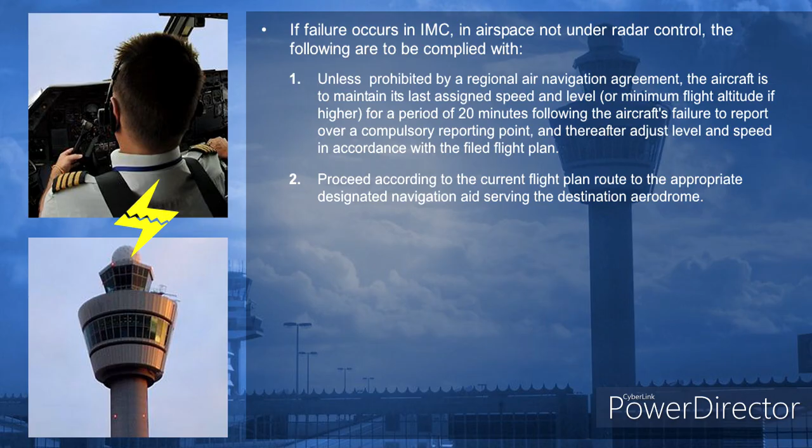Third, commence descent from the nav aid at or as close to the expected approach time, EAT, last received and acknowledged. If no EAT has been received and acknowledged, descend at or as close as possible to the ETA resulting from the current flight plan.

Fourth, complete a normal instrument approach procedure as specified for the designated aid. And fifth, land if possible within 30 minutes after the ETA or the last acknowledged EAT, whichever is later.

In airspace under radar control, as in the case over Europe, the IMC procedure differs slightly. Here, the flight should remain at its last assignment for only 7 minutes, until reverting to flight plan. This is because, with radar monitoring, the 7600 squawk should be noticed quickly.

The 7 minutes is based upon the latest of the following times: the time the aircraft reached its assigned level, or, if there was no assignment before the radio failed, the time the minimum flight altitude was reached; the time 7600 was set; or the time the crew were unable to report position over a compulsory reporting point. The remainder of the procedure is the same as the IMC and non-radar airspace SOP discussed previously.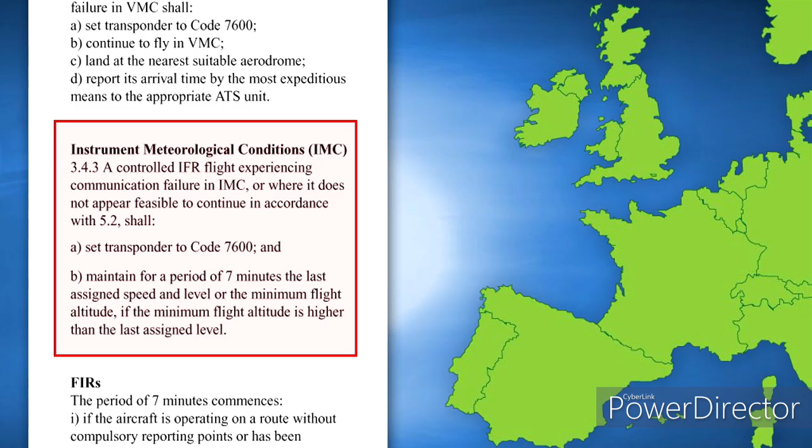Where an aircraft is being subject to unlawful interference, for example a hijack, communication with the appropriate ATC authority is to be attempted. This will enable the authority to give priority to the aircraft and deconflict other air traffic in the event of deviation from any flight plan.

Specifically, unless conditions dictate otherwise, the PIC is to attempt to continue to fly the assigned track at the assigned level, at least until able to notify an ATSU or until within radar coverage of a radar unit.

If forced to deviate from an assigned track or level without being able to notify an ATSU, the PIC should, if possible, attempt to broadcast a warning on the VHF emergency frequency 121.5 MHz and use other onboard alerting equipment such as SSR on mode alpha 7500 or data links, and proceed in accordance with applicable alerting procedures for in-flight contingencies established and published in document 7030 regional supplements.

If no regional procedures have been established, proceed at a level different from IFR levels by 1,000 feet above flight level 290, or 500 feet below flight level 290, or when reduced vertical separation minima, RVSM, are used.

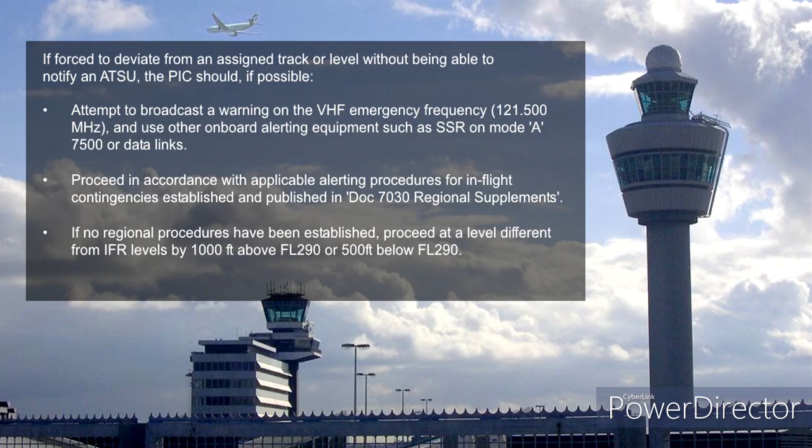Under Article 9 of the Convention on Civil Aviation, each contracting state has the right, for reasons of military necessity or public safety, to prohibit the aircraft of other states from flying over certain areas of its territory, and to establish procedures for the interception of aircraft flying over that territory.

Ultimately, the regulations of a state may prescribe the need to investigate and identify an aircraft. Thus, it may become necessary to lead an aircraft of another state away from a particular area, or require it to land for security reasons at a designated aerodrome.

Adherence to flight plans and maintaining a listening watch on the appropriate air traffic frequencies make the possibility of interception extremely rare. In formulating such policies, states are to recognise that to ensure general safety in the air, any visual identification signals are to be made in accordance with Appendix 1 to Annex 2 of the Chicago Convention.

This lays down standard rules for intercepting aircraft and mandates that intercepted aircraft are to comply with the standards set out in Appendix 2, Section 2 and 3 to Annex 2, interpreting and responding to visual interception signals.

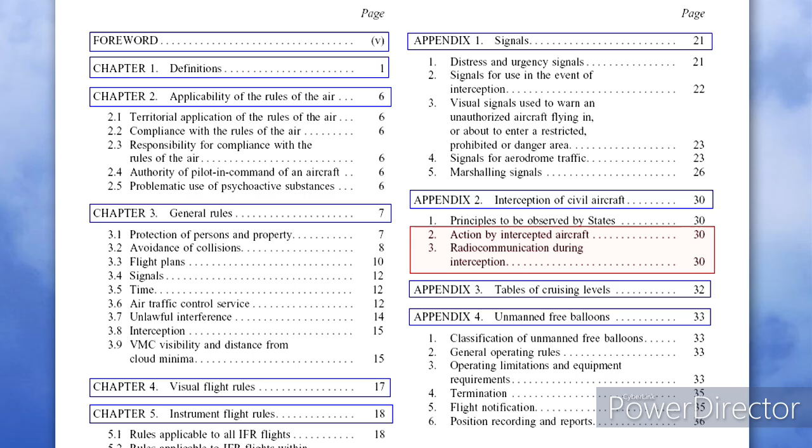If the identity of an aircraft is in doubt, all possible efforts will be made to secure the identification through the appropriate air traffic authorities. As intercepting civil aircraft is potentially hazardous, the intercepting procedure is to be used as a last resort.

An intercepted aircraft shall immediately follow the instructions given by the intercepting aircraft, notify, if possible, the appropriate air traffic service unit, and attempt to establish radio communication with the intercepting aircraft or with the appropriate intercept control unit by making a general call on the emergency frequency 121.5 MHz, giving the identity of the intercepted aircraft and the nature of the flight.

If this frequency elicits no response, calls should be made on 243 MHz in an attempt to establish contact. If equipped with SSR, then select Mode A, code 7700, or any other code that you are instructed to.

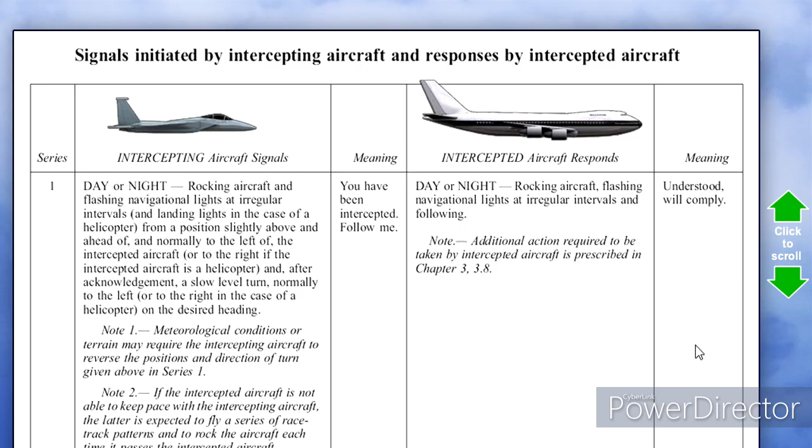An aircraft is considered to be in a state of distress when it is in grave and imminent danger and requests immediate assistance. The pro word for such a call for help is Mayday.

The visual signals are Morse code signals SOS, a succession of red pyrotechnics, and a red parachute flare.

The sound signals are Morse code signals SOS, continuous sounding with any apparatus, radio telegraph and radio telephone signals consisting of 12 dashes of 4 seconds each, with a pause of 1 second between each one, sinusoidal audio tones of 2200 Hz and 1300 Hz, with each tone duration of 250 milliseconds. This alarm is sent automatically for a duration of at least 30 seconds, but not more than 1 minute.

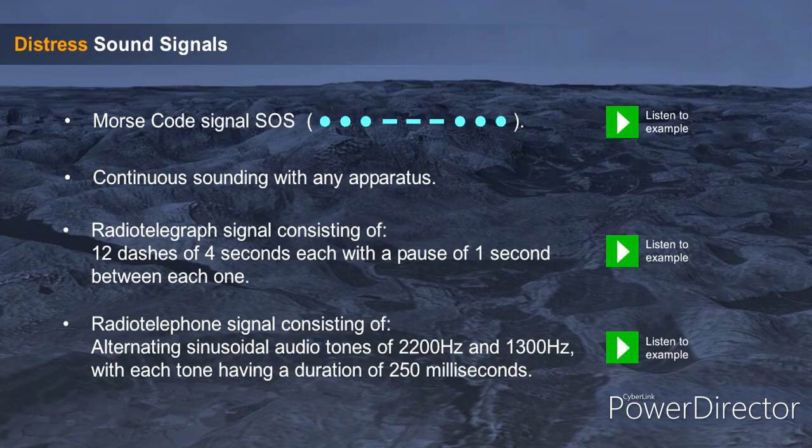If an aircraft has an urgent message to transmit regarding the safety of itself, other aircraft, vehicles, or other property of a person on board or within sight, then the message is classified as being urgent. The pro word is pan-pan.

The visual signals are Morse code signals XXX. The sound signals are Morse code XXX.

Any aircraft that is in any form of difficulty that wishes to indicate by means other than RTF that it is compelled to land, but does not require any assistance, may use either of the following visual signals: repeated switching on and off of its landing lights, or repeated switching on and off of its navigation lights, so as to distinguish from normal flashing operation.